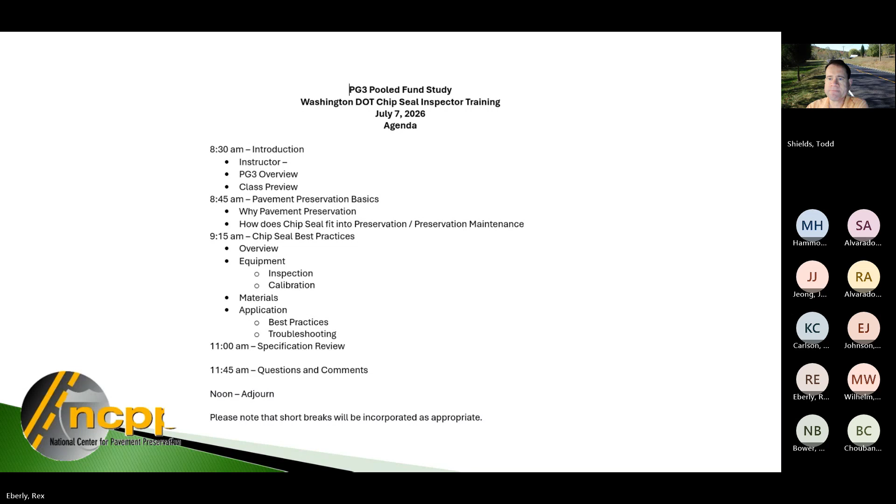Thanks, Eddie. Do you know if Joel's going to be joining us, Eddie? I guess we'll see if he jumps on. He's not on currently. Yeah, Joel is Minnesota DOT, and they're the lead, as you're going to learn here in a second. So we'll see if Joel makes an appearance.

Rex, there we go. You want me to keep going, or it looks like this is my part anyway, unless Joel's on. Rex, you're muted. Oh, no, you're not. Did we lose you, Rex? No, here we are, I'm sorry. Okay, yeah, go ahead, I'll let you take over from here for this next couple of slides. Eddie and Bouzid, if you want to jump in and add anything, that's fine. Go ahead and move on.

So just wanted to explain a little bit here, background for most of you guys, I'm guessing may not fully understand what this project is. PG3 is kind of a colloquial term, the title is actually there, you can read it: The National Partnership to Improve the Quality of Pavement Preservation, Treatment, Construction, and Data Collection Practices, which is quite a mouthful.

So this is a pooled fund. If you're not familiar, pooled funds are mechanisms for states such as Washington to jump in, partner with other states, and pool your funds, as it says, to accomplish a bigger project than what you'd be able to do on your own. PG3 is a pooled fund, and there are some websites here, the actual solicitation and the PG3 website.

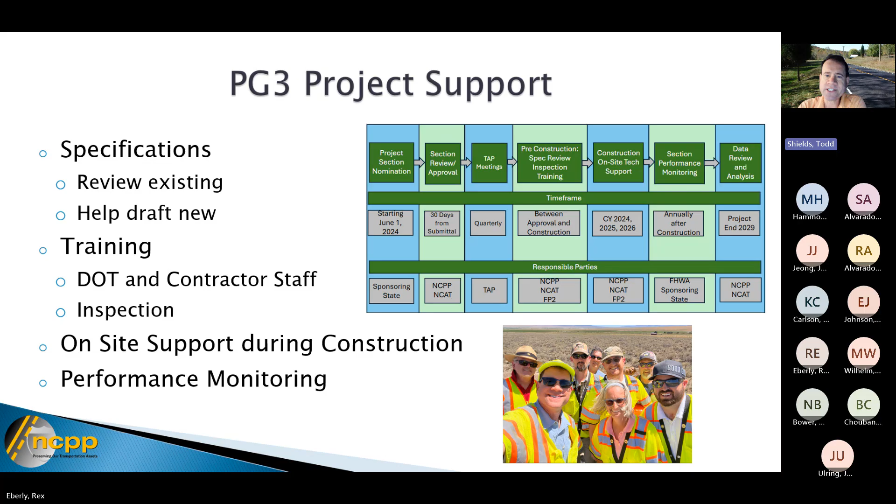So what we do, last year we kind of got into the swing of things. North Dakota joined the pooled fund. They had built a bunch of test sections prior to PG3 even starting, so they're just looking for help, training, and data collection on those test sections that they already built.

Mississippi, last April-ish, constructed their scrub Cape Seal, which was a first for them. Idaho did their first 100% RAP chip seal, which is something that's really catching on nationwide. And then Minnesota did another scrub Cape Seal way up north. North Carolina did a spray-applied rejuvenator, which was part of the PG3 project, and they're starting to take off and do a lot of that now.

And then Delaware is trying to get back into microsurfacing. They've got an interesting situation with a road that has a lot of Amish buggy traffic, so they're using the microsurface to fill in the ruts caused by the hooves on the horseshoes.

And then coming up in 2026 — well, Alabama's already done their scrub Cape Seal, which was a first for them. That was done in April, May.

Alaska just in the last couple weeks did a chip seal in the Juneau area. If you guys are familiar with Juneau, there are no roads in and out of there, and it's a rainforest, so that was an interesting one. They had to actually bring equipment in. They had some issues, but they got it done. And then we think next up will be you guys with your rut fill chip seal.

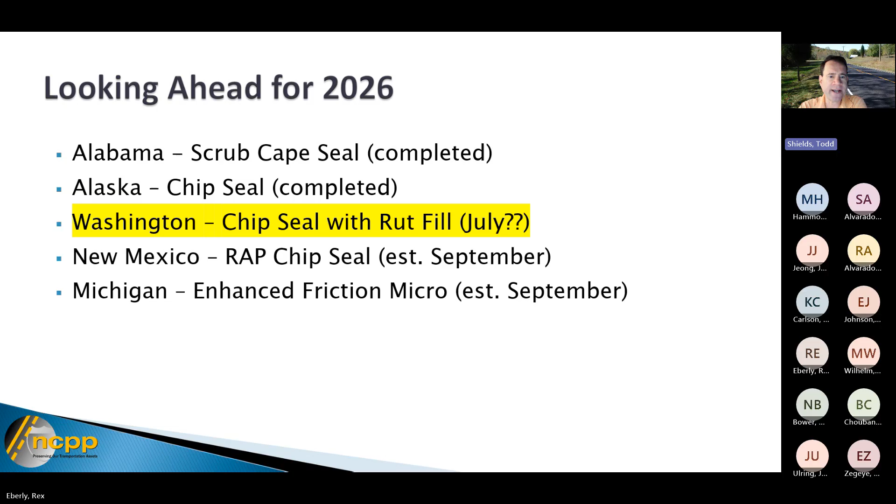Okay, very good. And then for sure this year we'll have New Mexico — they are also going whole hog into RAP chip seals, and they're looking at September for that one. And then Michigan DOT has been poking around with less expensive versions of high friction surface treatments. They're calling it enhanced friction microsurfacing, not to confuse it with the other, but they're blending in the calcined bauxite with their native aggregates and seeing how that performs. So they're looking to do that in September as well.

So there's a website, I mentioned that earlier, the PG3 study website. If you want to visit that, we post all of the trainings that we do.

This will be posted out there, so you can go back and look at other states that we've done training for, information about the fund, upcoming meetings, and other resources. There's some forms Rex is going to get into in a little bit that are out there on the website.

Some upcoming activities. We got our training with you guys today. Karen's in Japan, so she's not able to make today, but we do have another virtual TAP, the technical advisory panel, coming up middle of August. That'll be about an hour or so, virtual.

We do have two in-person TAP meetings every year. We met back in May in conjunction with the Northeast Pavement Preservation Partnership. The next one in person will not be in conjunction with a partnership meeting, but a standalone visit and tour of the MnROAD test track.

Following that, there'll be another virtual TAP over the winter, and then the first in-person meeting of 2027 will be in May at the NCAT facility. They do a 3-year cycle on their test track, so this will be starting a new cycle, and we'll be part of that.

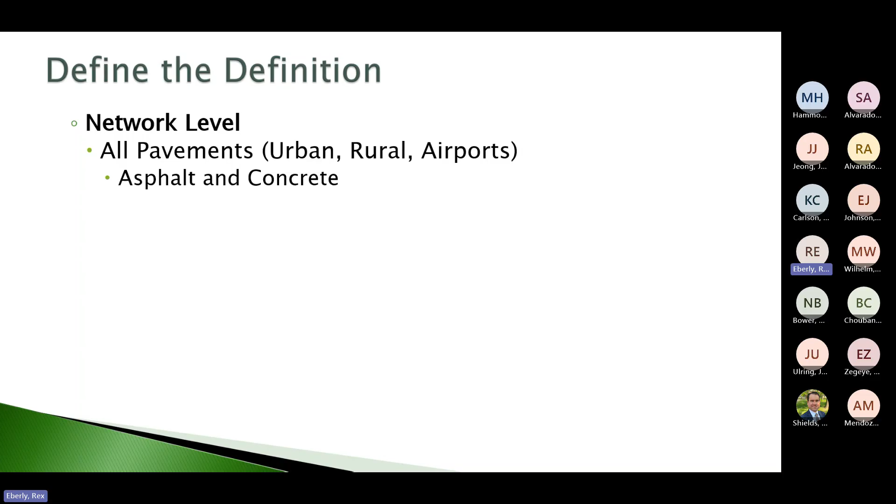You need to look at your asphalt and concrete. For so long we've thought concrete doesn't need preservation. Well, it does, and there are things we can do to your concrete pavements to help them last longer as well and keep them in good condition. It needs to be a long-term strategy, a budgeted expense.

The best states who really excel at pavement preservation budget for it, and they don't take money out of their pavement maintenance or preservation fund when they have a hurricane or a downturn in the economy or whatever issue. They continue to fund that pavement preservation because they understand that keeping those good roads in good condition saves them money in the future. And it needs to be integrated.

It needs to be department wide, all stakeholders. So I guess what I mean by that is if your maintenance department has a pavement preservation strategy but your pavement engineer group or other parts of the DOT don't, you're working against each other. The entire department needs to buy into pavement preservation. And again, cost effective—right treatment, right road, right time.

One way to bring this home is we've been working quite a bit with the Mississippi DOT and did some training, almost a month of training in Mississippi this spring. One of the things they told us, the reason they decided they better get into pavement preservation, is they did a study over the last 5 to 10 years. Their, and I'm using air quotes here, pavement preservation process of choice is a 2-inch mill and fill, which is really almost outside what we really think of as a pavement preservation tool, but that's what they had.

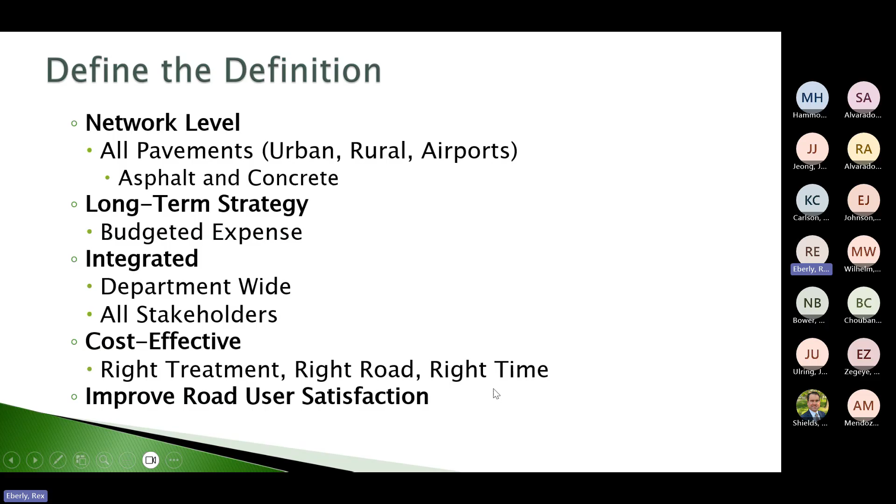We want to improve road user satisfaction, obviously. So again, why develop a preservation mindset? Your budgets—you guys know this. Few agencies can afford a strategy of build it, rehab it, and build it again.

Bouzid could do that in Florida because he had a mouse giving him some money with Disney, but most agencies don't have that. So pavement performance, your FHWA performance thresholds are going to be difficult to meet without preservation. If you're having to wait 18 years before you can afford another rehab on a roadway, those performance thresholds are going to drop and you're not going to meet them.

Material changes—I don't know about your area, but every other location in the country I talk to, pavements aren't lasting as long as they used to. When I ask folks how long a new overlay is going to last them, around the country I'm hearing 8 to 12 years. Is that about what you all are seeing, or are you getting better or worse than that?

So preservation stretches the service life of these pavements. And then the other thing is sustainability. We've got the Carbon Reduction Act and environmental product declarations. Washington State has a carbon reduction strategy.

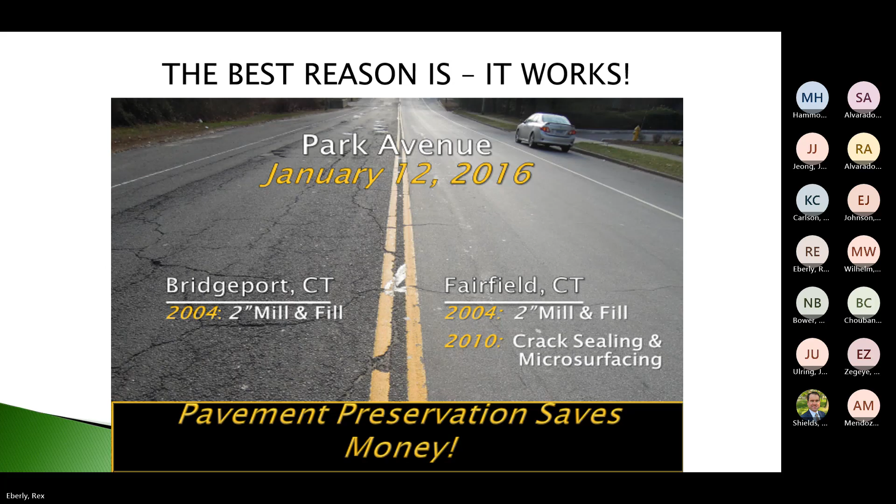So why don't we just mill and fill everything? Well, let's talk about that.

So we're going to look at one state. This is a worst-first state, very overlay heavy. These are their 2023 numbers that came off their website. They spent about $1.6 billion for what they called roadway preservation activities. They consider that capital preventive maintenance, usually mill and fills, and then highway, freeway, and non-freeway resurfacing.

In 2023, they covered 2,138 lane miles of their 32,000 lane mile system, or about 6.7% of the network.

So if you take that out, that's a 15-year cycle. They get to a road in 2025 and they're not going to get to it again until 15 years down the line. But we've already determined that our pavements are lasting 8 to 12 years. So we already know we're in trouble. And because they're worst first and they're not doing any light preservation, they're doing all heavy work.

That $1.6 billion over those 2,138 lane miles was $748,000 per lane mile. I gave this to that DOT. I was down doing training because they were seeing this internally. I don't think they'd looked at it this way, and they knew that they had to change.

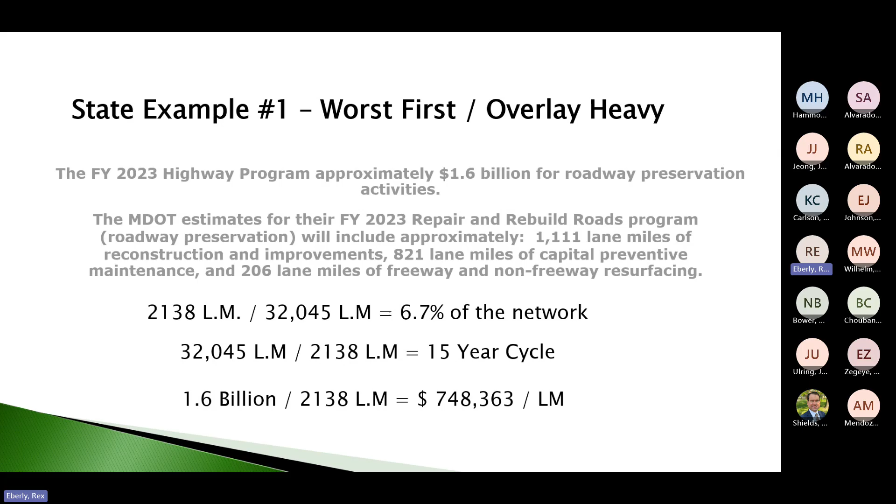That's all they touched with anything in 1 year - 6.7% of their network. He says, I don't know where we're going to go from here. I don't know how we can get out of this. So that's a place we don't want to be.

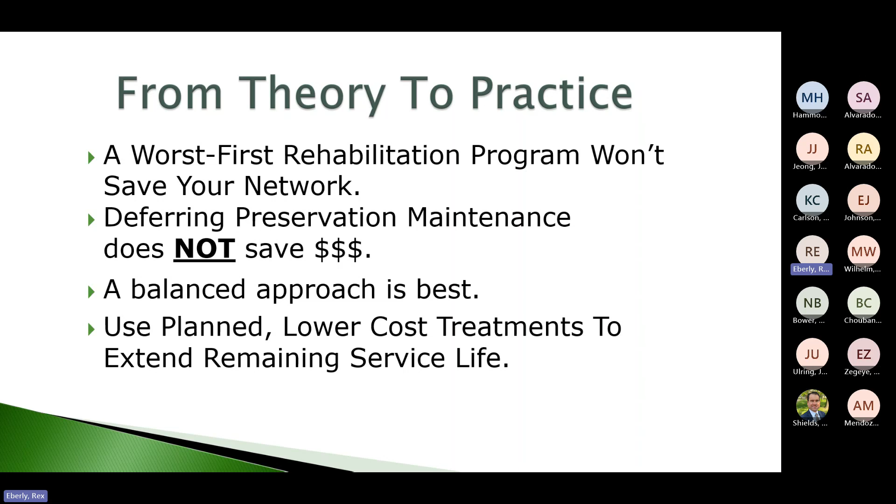That's what this study is really all about, using planned lower cost treatments to extend remaining service life. I like to talk about preservation and preservation maintenance. True preservation to me is placing a treatment that preserves the surface and extends the remaining service life of the road. We're doing this on a road that is in good condition. Preservation maintenance is repairing surface defects, but then still preserving the surface and extending remaining service life. So patching really isn't preservation maintenance. Patching is just reactive maintenance. There's no preservation to that.

True preservation is time-based. We're learning now that the quicker we put something on that pavement to stop or slow oxidation and moisture intrusion, the better we are. And we shouldn't wait until we see deficiencies in the pavement distresses before we do something.

So preservation's early and often. Preservation maintenance is time and condition based. You know you need to keep up with that pavement, you need to schedule it, you need to work to get up to that 20-25% touches per year, but you also have to be condition based. So you place as early as possible when defects occur. We're adding service life, or we're stopping deterioration and adding service life. The best thing is these preservation treatments are generally less expensive.

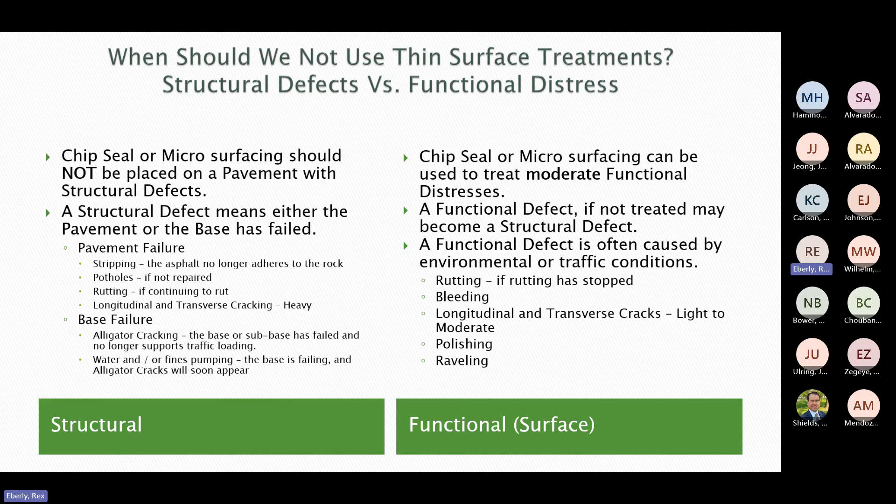With a functional distress, which is what we call a surface distress, chip seal or microsurfacing or any of these thin treatments can be used to treat moderate functional distresses. A functional distress, if not treated, becomes a structural defect down the line. A functional defect is often caused by environmental or traffic conditions. It can be rutting. If the rutting is stopped, then we can do something with it. If we've got bleeding or flushing, longitudinal and transverse cracking that's light to moderate, polishing and raveling, those are functional issues, functional distresses, and that's where pavement preservation processes shine.

We learn a lot from roadresource.org. This is a website that was put together by the PPRA, which is an affiliation of the International Slurry Surfacing Association, the Asphalt Emulsion Manufacturers Association, and the Asphalt Recycling and Reclaiming Association. If you've not been to roadresource.org, there is tons of information there on pavement preservation, treatments, network optimization, pavement preservation, recycling, all sorts of stuff. I really recommend that you use this source. It's really good when you bring in new folks that haven't been introduced to pavement preservation, and they can spend some time on this website and get up to speed really quickly.

Let me get a drink of water here.

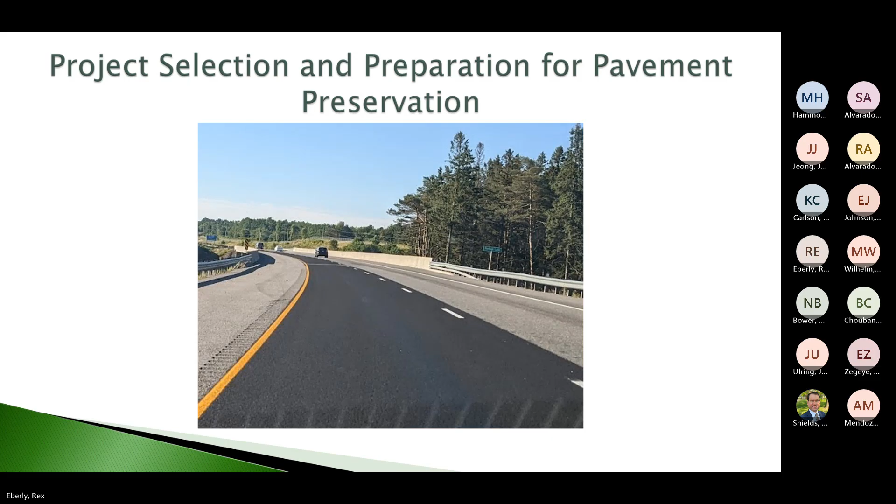Okay, so project selection and preparation for pavement preservation here. We're not going to go too deep on this, but as a designer, if you're designing a preservation project, the number one thing you got to understand is the intent of the preservation. Do I have a road that's in good condition with no defects or very few defects, and I want to keep that in good condition for another 5 years? Is that my intent? Or do I have surface defects that I need to repair first and then preserve that road for another 5 years? So what's my intent?

Do I have any untreated light to moderate cracking? We always want to crack seal first. I don't remember if I get to it, but the NCAT PG2 study showed that sealing cracks is probably the most cost-effective way of preserving a roadway, and that a road that's been in good condition, crack sealed, stays in good condition for at least 12 additional years.

Do I have untreated rutting? More than a quarter inch—those cause issues for some preservation projects, so I need to understand what kind of rutting I've got. Do I have isolated base repairs, or do I have a whole bunch of base repairs? What's the most cost-effective way of preparing this roadway for preservation?

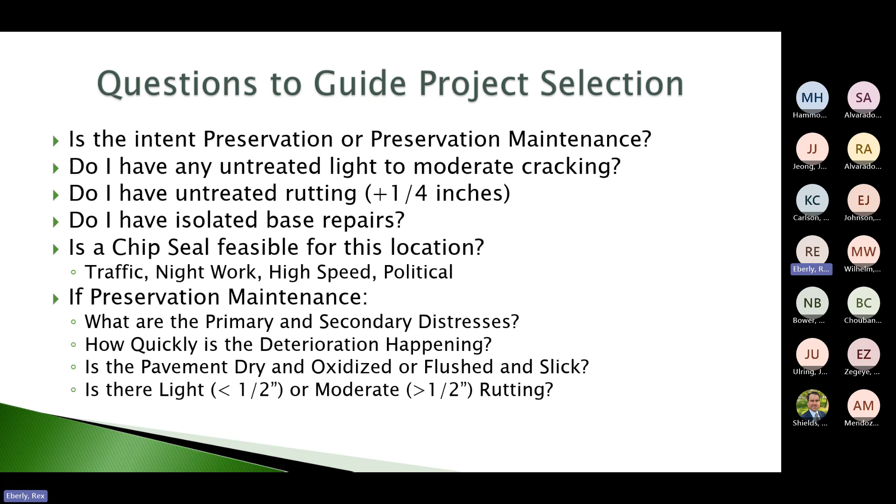If it's preservation maintenance, what are the primary and secondary distresses that I need to take care of? Is it cracking? Is it rutting? If it's a lot of minor cracking, can I take care of that with a scrub seal rather than having to go out with a crack filling crew and get them dizzy going all around filling all the cracks? How do I want to do that? How quickly is the deterioration happening? Is that road falling apart quickly, or have we just had a few cracks in the last few years, so maybe a lighter preservation treatment can really help and keep it going? Is the pavement dry and oxidized, or flushed and slick? That makes a difference on what treatment you select. Is there light rutting, less than a half inch, or more moderate rutting, more than a half inch?

Okay, so we're going to go into chip seal selection. Again, we are talking best practices here. There are times in the field where you all as engineers may need to make decisions based on budget, based on need, based on political issues. But from now on, we are talking best practices and how we hope it can be done.

Good candidates for a chip seal are minor cracking, raveling, loss of fines, some flushing. To me, that photo is maybe a little heavy on the flushing, but we can do a good job with the chip seal reducing the effects of flushing—probably not bleeding, though.

Oxidation is a perfect candidate for chip seal, followed by loss of friction. So that's a very good use of a chip seal.

Unacceptable candidates include rutted pavement if the ruts have not been repaired. This photo of rutting shows why it's not a great candidate for chip seal, because the asphalt emulsion is going to act somewhat like water. If we don't do certain things, which we'll talk about later, chip sealing on rutted pavement means we'll have asphalt emulsion where we don't want it, embedment too high, and we could have bleeding and other issues. So unrepaired rutted pavement is generally an unacceptable candidate.

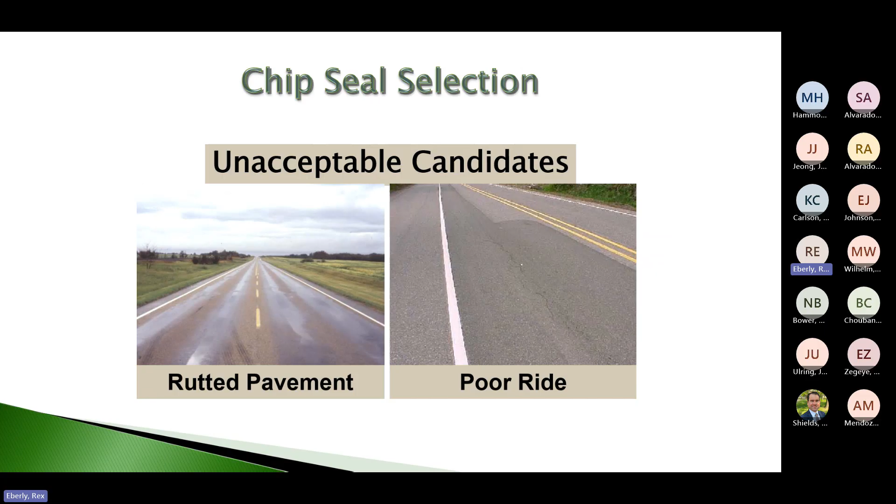Untreated cracks greater than a quarter inch need to be treated. We'd like to treat all cracks, but anything over a quarter inch definitely needs treatment before we chip seal, because the chip seal emulsion will not seal that crack completely, and it will allow chip seal aggregate into it, and that crack will grow over time.

Preparation for all preservation projects is the same. The early stage is crack treatments. We really want to crack treat before doing a preservation process, and like to have that done at least 30 days ahead of time if we can. We want to get traffic on that crack treatment to level it out and get it down into the crack, so we don't have bumps. We want our overbands on crack treatments to be thin, within about an eighth of an inch thickness, so we're not leaving a bump under a chip seal or picking it up with a microsurfacing spreader box.

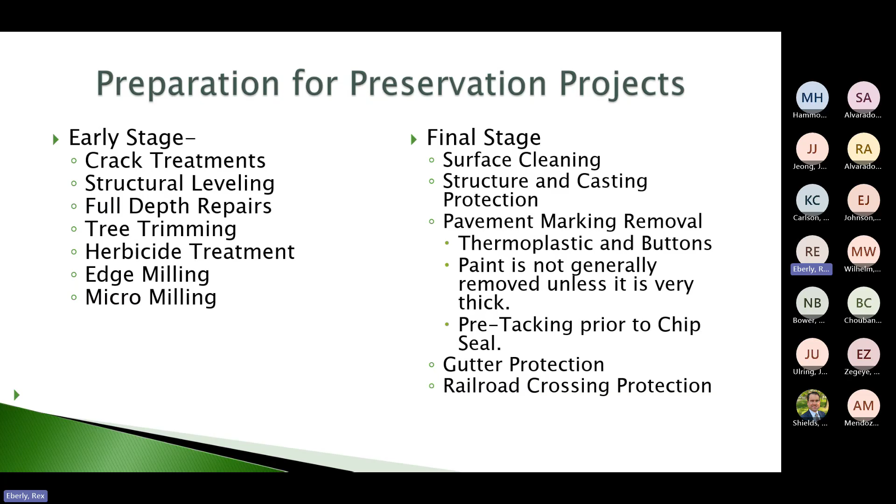Crack treatments should always precede a surface treatment. We like to see them completed at least 30 days prior. Overband thickness should be less than 1/8 of an inch. If you're using mastic, it's a great product under pavement preservation processes. We want those usually to be flush or slightly below the surface.

We need to remember with any of these thin treatments, we can kind of level a dip or a low patch or a low crack or whatever. We can level that a little bit. But if your maintenance application, whether it's a patch, crack treatment, or mastic, makes a bump, we're going to have a bump when we're done. There's nothing we can do about that.

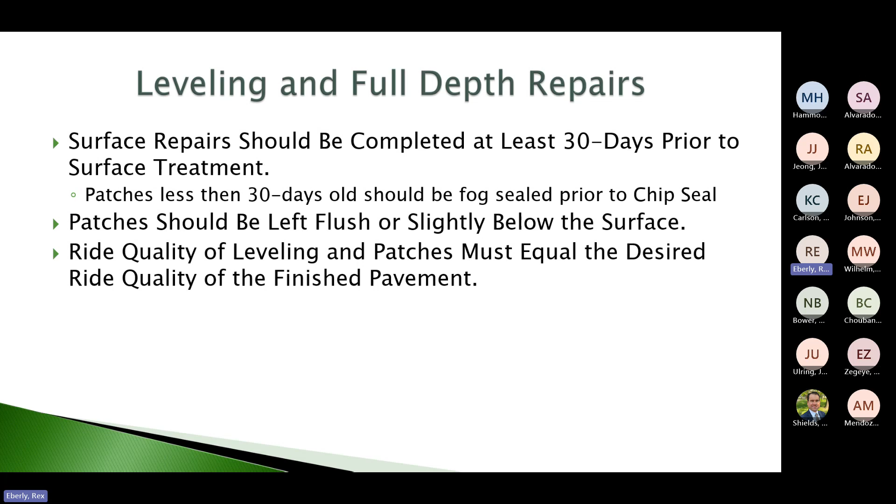So we want to be careful with all of our patching or crack treatments. I think we talked about that here - completed 30 days prior, fog seal, left flush or slightly below the surface. Ride quality of leveling and patches must equal the desired ride quality of the finished pavement. We can't fix rough patches with these thin treatments. A bump's always going to be a bump.

It really helps the preservation adhere. It takes away some of the rutting. It takes away some of the roughness. It's a good treatment to do underneath your preservation treatments.

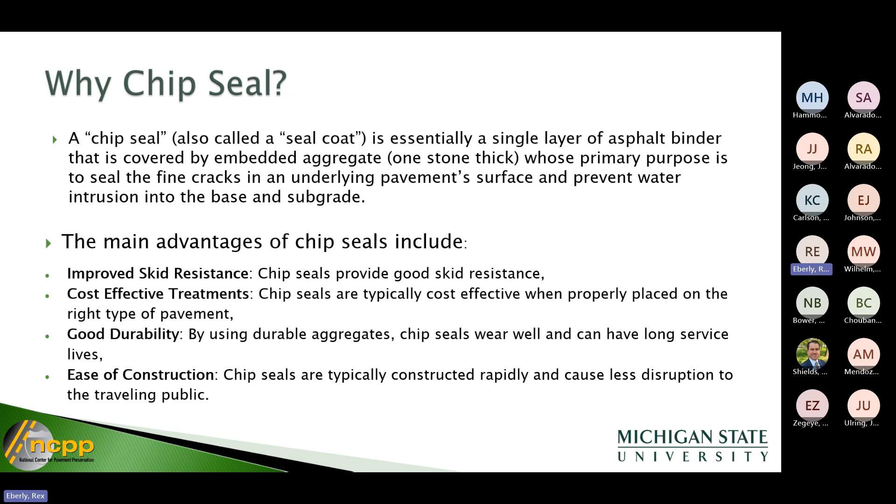And then construction, ease of construction. They're done rapidly, don't take a ton of equipment. They do take a lot of skill - it is an artwork - but they don't cause a lot of traffic disruptions, so it's just a really great process. And I'm an old microsurfacing guy, so for me to talk up chip seals this much, you need to understand I do think they're a great product.

We've talked about most of this, but the good thing is, and you guys are learning this, you're using it now - chip seal can also be an effective form of minor rehabilitation. Especially if we double stack a chip seal, or use a chip seal before as a cape seal, or even some parts of the country use chip seal as an interlayer below their hot mix, and it works really well for that as well.

So a lot of reasons to use a chip seal.

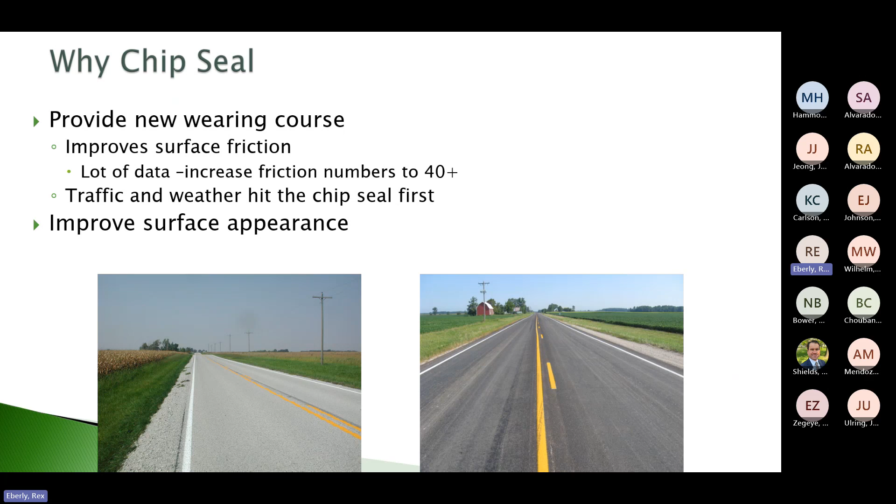We're arresting raveling, talked about that. New wearing surface friction - I think that's one of Todd's chip seals there on the lower left, one of the limestone seals in Indiana. So it helps that surface appearance. However, we've got to remember, a chip seal does not add structure to a road.

If you have a bad road before, you're still going to have a bad road after. So we just have to realize that when we're choosing these roads to put a chip seal on.

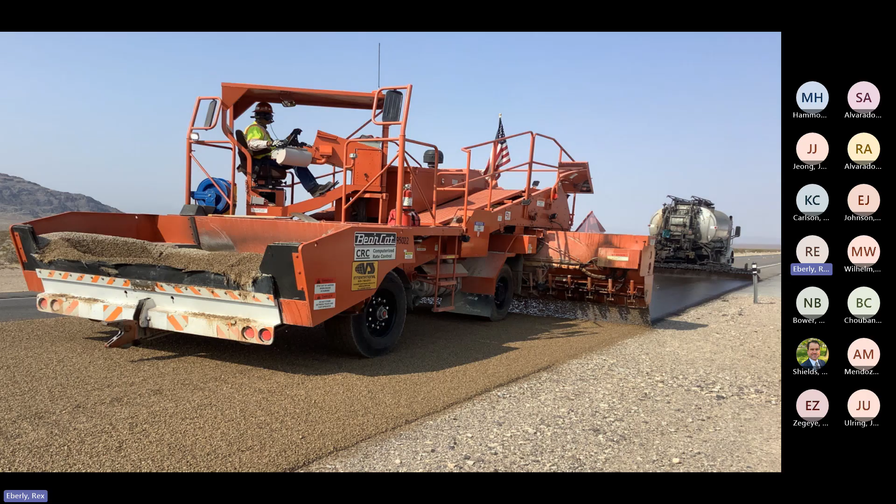Just love this picture. I stole this from somebody out west. They're doing everything right here.

This may be a hot rubber chip seal, it may not be an emulsion, but they are right behind that distributor, getting those chips on before it has time to break or cool, depending on the asphalt, liquid asphalt that we're using.

Love it. Got the American flag there, makes me happy.

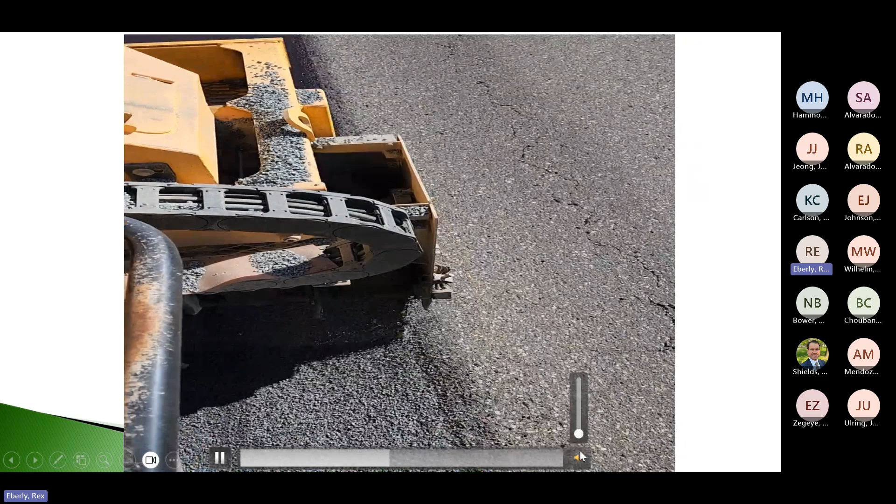And another one here, shown there on the chip box, with that joint there, looking really good. The crew did a good job up there.

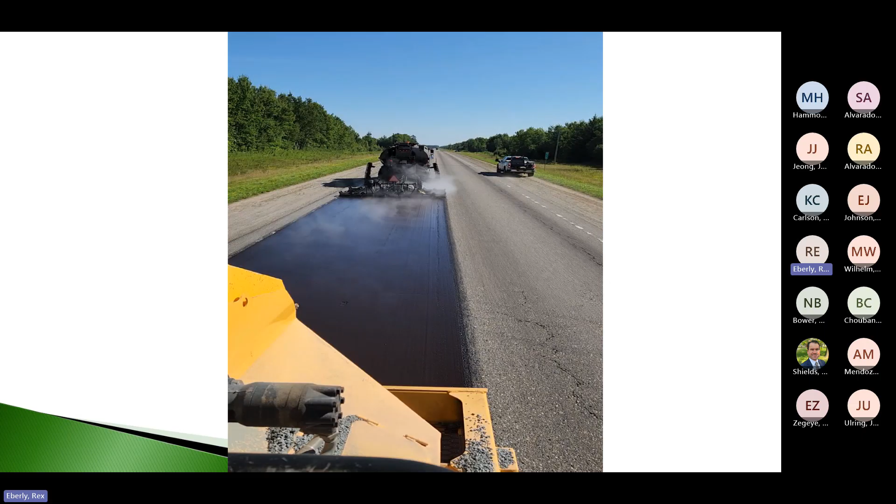And one more. This is a scrub chip seal, so they are scrubbing this in, but you can see how that scrub broom is filling in the cracking, and how the distributor and the aggregate chipper are close together. That is one of the main best practices that we have. As we get forward with you all doing a chip seal in rutted pavements, this becomes even more important, and we'll talk about why as we get going.

Gotta hit the right button here. And one more.

So the chipper pulls up and grabs onto the dump truck. Let's make sure they're latched. Communication is good. You can see the rollers right up where they should be, right caught up.

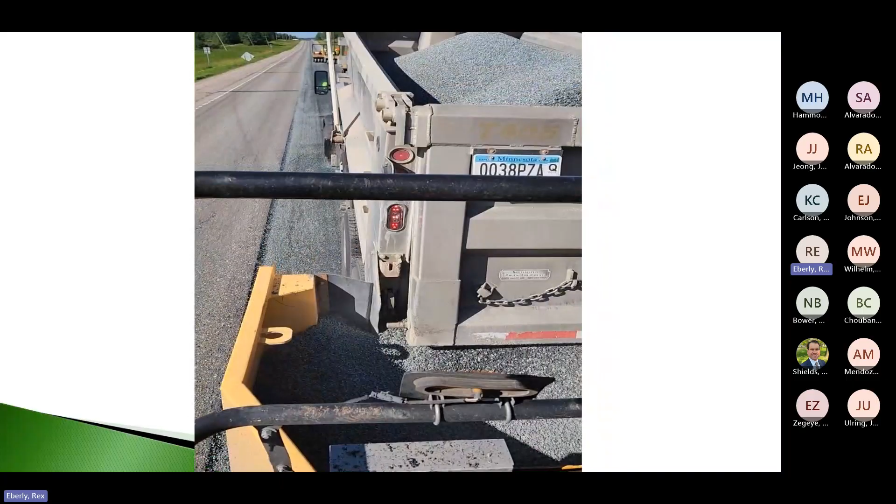So we're going to talk about rollers and how often they should roll. Oh, sorry about that, I hit the wrong button. Go to the next one.

Okay, as we move forward, I want you to think of the term embedment. That is the most important part of a successful chip seal: did we get the stone embedded correctly into the asphalt membrane? That's the whole thing we're trying to do here.

We have sprayed an asphalt membrane at a certain thickness, certain gallons per square yard. We want to make sure that our aggregate gets embedded far enough into the membrane so that it's held by the asphalt and won't come off when we roll it, broom it, or even worse, when people drive on it. But we can't be embedded so much that there's a chance that when it gets hot or when traffic hits it, we're going to either push that stone further into the membrane or have the membrane swell up a little bit and overtop the stone, because then we have flushing and bleeding.

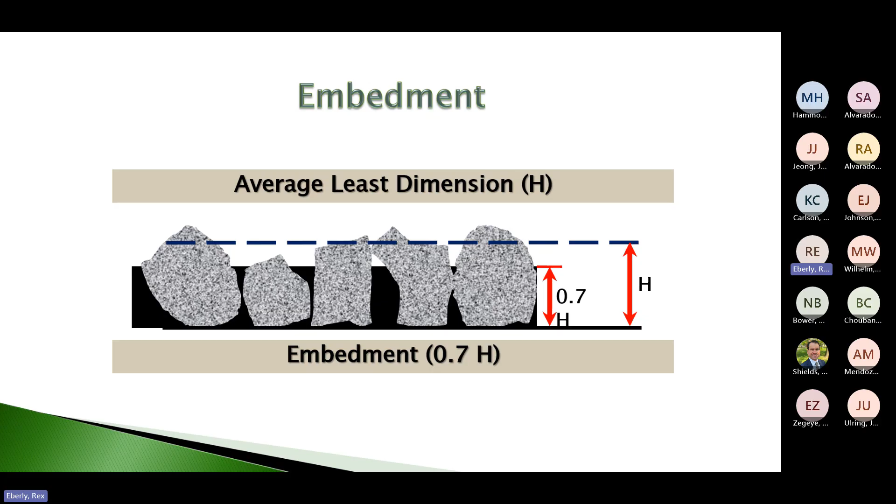So everything we're going to talk about from now on leads us to embedment. That means the materials that we use and all the best practices that we have. That's our goal. Everything that your contractor does out there, everything your materials group has done - I don't know if Washington DOT does the chip seal design or if the contractor does - but everything done in the material section and in the application affects embedment. So the emulsions, the aggregates, the equipment, how the distributor operates, how the chip spreader operates, how we roll, what we roll with, brooms - those make a difference. There are application best practices, and the existing pavement that we're putting it on also has something to do with the embedment.

Let's talk a little bit about emulsions. We're not going to go too deep, but if you want to learn more, the roadresource.org website is excellent. There's a whole set of chapters on emulsion, and it's very good.

Asphalt emulsion is a chemically stabilized dispersion of fine asphalt particles dispersed throughout a continuous water phase as a carrier. Here's a micrograph of what that looks like.

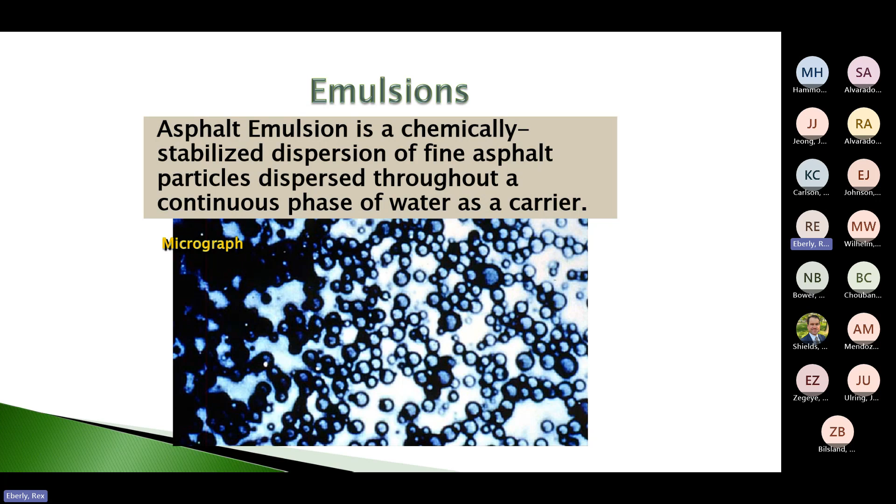You see all these particles that are roughly the same size. What we want an emulsion to do is keep these little particles of asphalt away from each other while we're pumping it, storing it, and transporting it. Then, whenever we want those particles to come together and stick to either the aggregate we mix it with, the road we spray it on, or the aggregate we drop in, we want it to break, set, and cure, release the water, let the asphalt particles grab onto whatever we want them to grab onto, and then become traffic ready. That's how an emulsion works.

These folks are blessed to own this. Every day they go out with a track excavator and dig up whatever asphalt they need that day to process, and the next morning the lake is back at the same level it was the day before, and they do it again. They turn that asphalt into all sorts of asphalt emulsions and asphalt cement, and it's used in that region. For the rest of us who don't have a lake of asphalt in our backyard, we have to use crude oil.

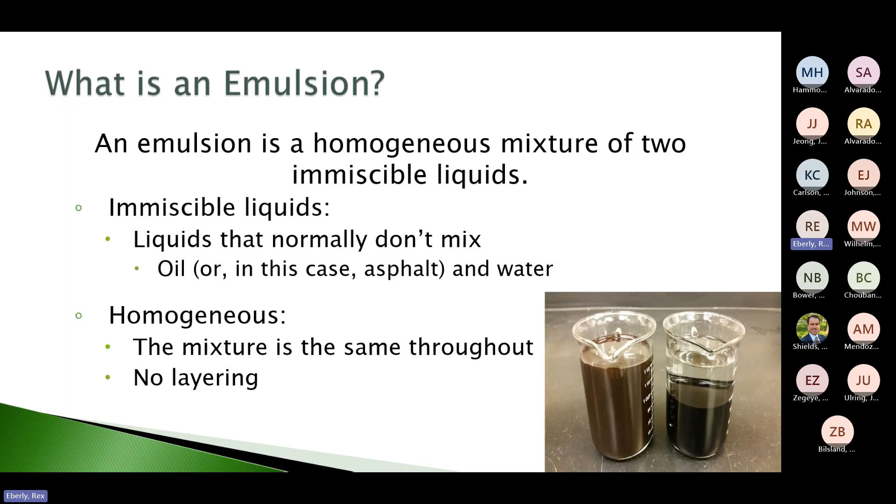Again, it's a homogeneous mixture of two immiscible liquids, and that's hard to show in a presentation. Homogeneous means they're all together - you don't see any separation in that photo. Immiscible means they don't normally mix: oil, asphalt, and water.

The manufacturing process is pretty simple. We take what's called a soap solution - that's the term used - which has water and emulsifier. The emulsifier, for lack of a better term, acts just like Dawn dishwashing liquid, and that's why we call it a soap. Some of them are very similar to soap.

So what we're doing is slicing those asphalt particles and turning them into little droplets, very fine droplets of asphalt. Then we're injecting that soap solution into that, and the emulsifier coats all of those little bitty baby particles of asphalt with the emulsifier. Then we pump it into the tank and we can store it.

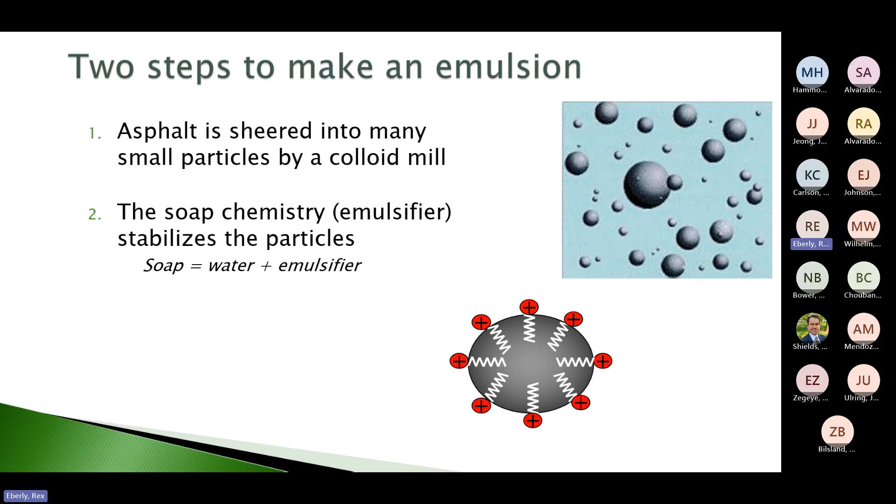That one's kind of a little bit more on the colloid mill. An emulsion plant is not a big operation. At a company I used to work for, we had one in a 40-foot shipping container, and that, plus some plastic tanks and a water source, and you are in the emulsion business.

The emulsifiers and additives that we put into the emulsion can be latex for flexibility. There are all sorts of different chemical packages that the emulsion supplier will use. What that does, again, is stabilize that emulsion, so we don't want it to separate until we want it to. And then it gives it its curing characteristics, and helps it grab onto the aggregate differently or better.

So it's very important. What I like about emulsions is that the manufacturer can really tailor an emulsion to the job you're doing, the aggregate you're using, sometimes even the contractor. They can make changes that one contractor needs that another one, with their process, maybe doesn't. Really interesting stuff. There we show those little particles bouncing around because they're all positive in a water phase.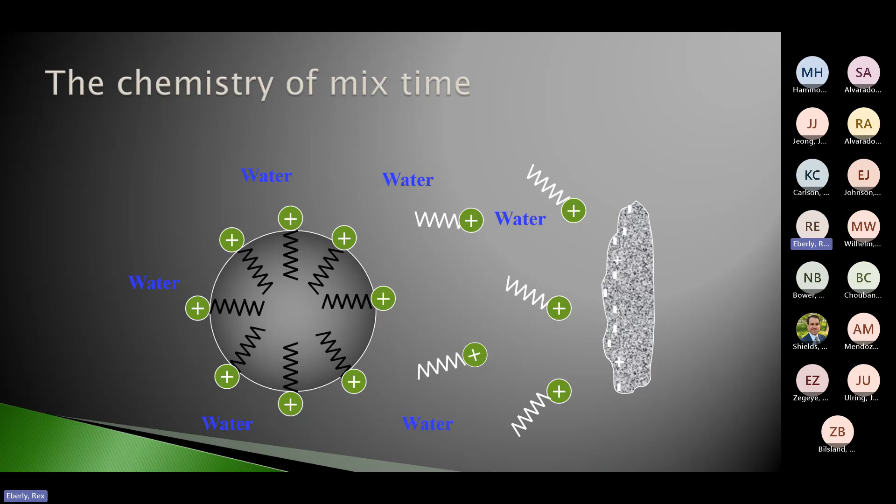And then that aggregate particle is either negatively charged or very slightly positively charged. So all those little positive ions coated around the asphalt particle are now attracted to that aggregate, and that asphalt particle will move and grab onto it. Boom, we've got what's called the chemical break, where the asphalt cement is now turning from an emulsion into asphalt cement. It's grabbing onto that aggregate and building strength like we want.

This asphalt is no different than the asphalt you're using in a hot mix HMA project. It may be the same asphalt, it may not be, it may be better, but where they're using heat, we're using water. Once that water is out of the system, you're left with an asphalt surface treatment, just like if it was a hot mix overlay. Emulsions are not inferior to hot mix paving.

So for chip seal emulsion, most parts of the country are using what's called a CRS-2P. Let's talk about what CRS-2P means and why it's important to the embedment. Number one, C means cationic, or positive charge. We saw in those little diagrams that it was a cationic emulsion because the coating of emulsifier had a positive charge to it.

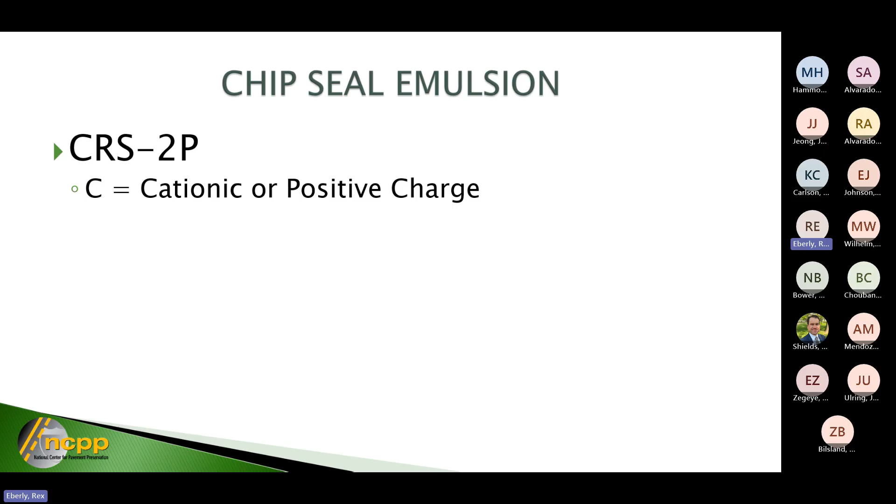There are also negatively charged emulsions, which would be an RS2P. We find that the cationic emulsion, because of the aggregate charges that most places have, is going to grab that aggregate quicker and build strength quicker than an anionic emulsion, one that's negatively charged. But there are places where that anionic emulsion works better with the aggregates they have. But I think we're using a CRS-2P.

The RS means rapid set. Set means how quickly the water is going to start separating from the asphalt cement particles. How long is it going to take till asphalt starts sticking to each other and starts sticking to the aggregate or the roadway, whichever we sprayed it on. So we want a chip seal emulsion to be rapid set.

There might be some ruts. When you drop that aggregate particle into that membrane of asphalt emulsion, you want it to start grabbing that rock immediately and going from a liquid to a solid so it doesn't have time to run off the road. If your 12-foot wide membrane spreads out to 12.5-foot wide because it won't break, set, and cure, then your embedment's lost.

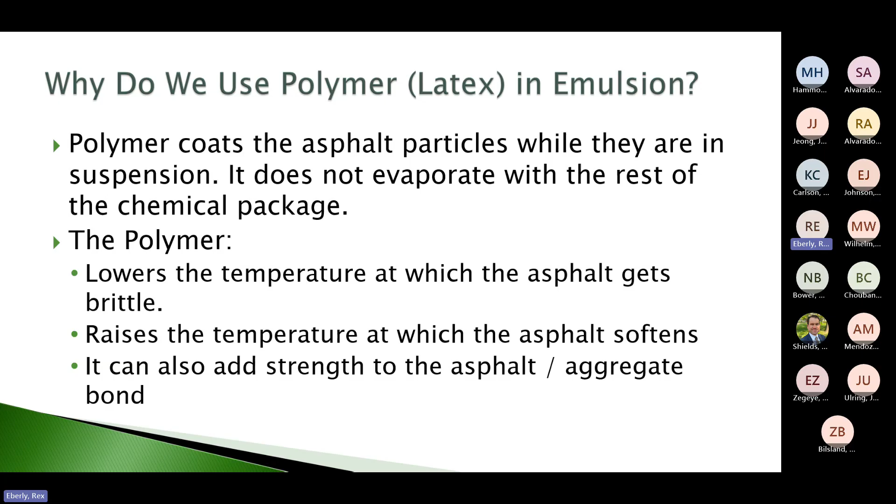That polymer changes the temperature at which the asphalt gets brittle. Where it may normally get brittle at -10, it's not going to get brittle until -30. And if it's going to move and push and shove at 135 degrees, adding polymer may give us a road temperature of 155 before it starts to move and shove on us. It also can add strength to the asphalt-aggregate bond. So I'm glad you're using polymers.

So let's talk about that aggregate. Number one, we really want a mostly single size aggregate, like shown on the bottom there. We don't want the dense graded aggregate, which means that we have aggregates retained on all of, or many of the sieves going through from 200 to 100 to 50 all the way up to 3/8 inch.

You can see there, if we have lots of different size aggregates, then we don't have the embedment that we want. You can see those little chunks of, I don't know, 30, 50, 16 falling down into the membrane, and then they're holding up the 3/8 inch stone, so it's hardly embedded at all.

And then also those are pushing some of that asphalt membrane up, so it's overtopping some of the other aggregates. That dense graded stone is going to be a poor quality chip seal, and you have a good chance of having a flush chip seal, either because you lost your stone or because the stone was overtopped by the asphalt membrane.

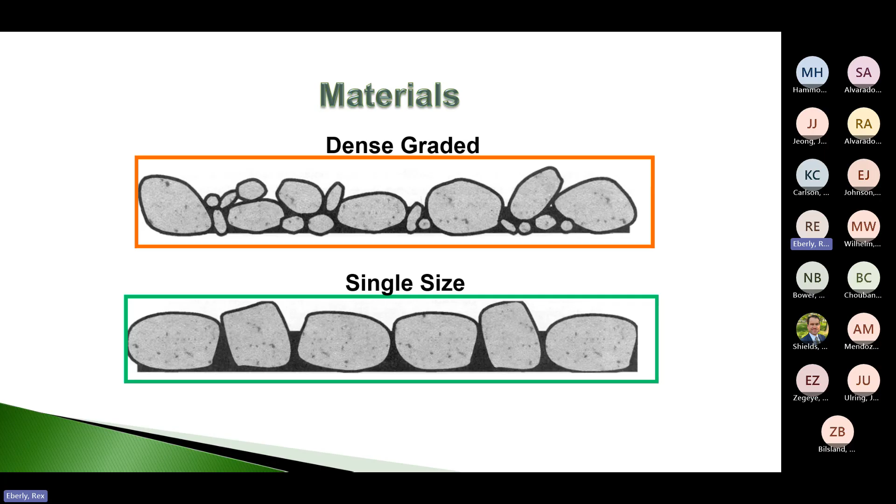So on the single size, you'll see that we don't have any of those little stones in there holding up the bigger stones. We don't have any small stones that are going to get overtopped. And that's really important when you look at your gradation.

We get our best aggregate performance on a chip seal when we have single sized with minimum fines. The fines that we have need to be clean. It's okay if they're rock dust. We can't have silt or clay fines - it needs to be free of clay.

That single size aggregate, we want it to be as cubical as it can be. If it's rounded, it's going to roll around. So we definitely need crushed faces, and we would love to have every face crushed and at least two sides crushed if we can get that. We want it to be abrasion resistant.

So the LA abrasion test is important because that aggregate is the only thing between the tires of the vehicle and the asphalt membrane. And really the only thing that aggregate's doing is protecting the membrane. It needs to be a tough, hard aggregate that's not going to degrade under traffic.

It needs to be binder compatible. If we have an aggregate that has a positive charge, maybe we want that anionic emulsion. And if we have one that has a very low positive charge or a negative charge, we probably want the cationic material. So it's important that we check in the lab that our asphalt emulsion is compatible with our aggregate.

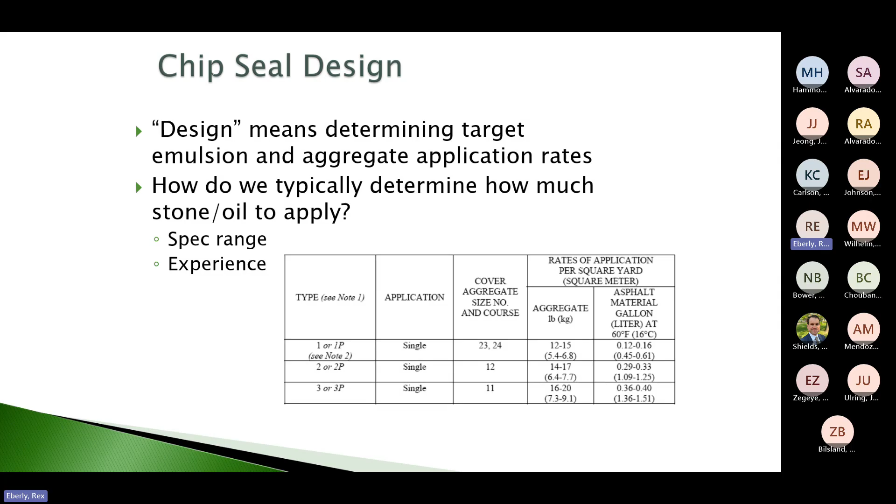So chip seal design, there's the Kearby, there's a modified Kearby, I can't even think about what the other one is, but they really want to look at how the materials are going to react, how much the road is going to drink, how dry is the pavement, and that's what determines our application rate.

You guys doing okay out there? Any questions?

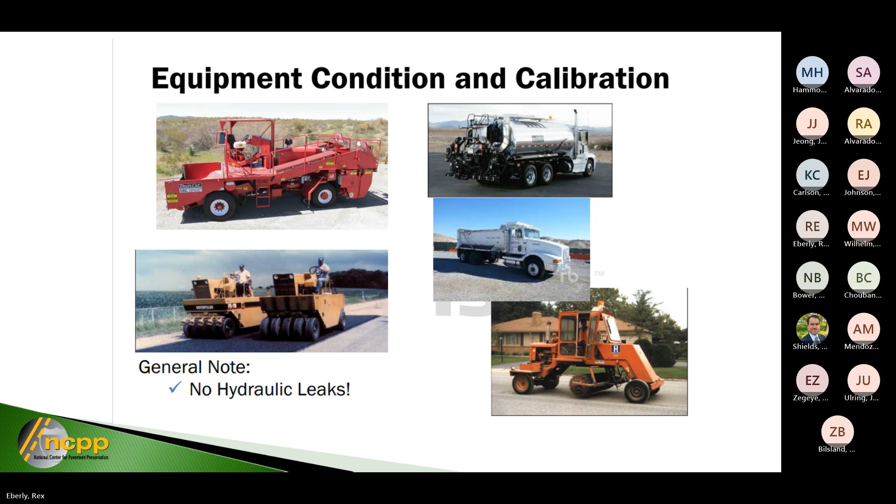Okay, let's talk about equipment. So asphalt distributor, we have a checklist here. The good thing is, we'll just get into it, but pretty much every distributor in captivity anymore has all of these. 15, 20 years ago, you could get distributors out on a job that weren't computerized and didn't circulate and didn't have a radar, all this good stuff. But pretty much now they're going to have this. Now, does that mean it works? No, that's you as an inspector.

That's your job, so it should have a computer. A computer on the distributor watches the pump, watches the speed of the pump, determines what bars are turned on, and then makes a bunch of calculations. It says, well, if the contractor wants 0.32 gallons per square yard and they want to drive at this speed, at this width, then I need to run the pump at this speed to make sure we get the right membrane of asphalt on the road.

They need to circulate between the tank and the bar, so that if we're circulating, we know that what goes out, what gets sprayed, we can measure that. We need a working radar, or some brands don't use radar, they use a transmission meter, but we need to know how far and how fast we're going.

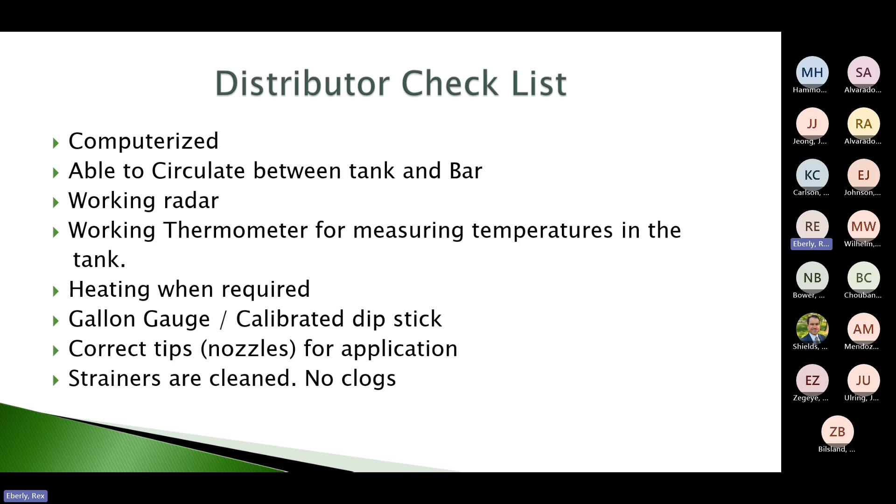And one thing is, if we're not cleaning our strainers, we're getting clogs of asphalt emulsion, clogs in our nozzles. The computer doesn't know that. It thinks you're spraying what it's telling you to spray. And if that material can't get through the system and out the nozzle, you're not getting what you think you're getting.

So why you should check your distributor's calibration - this is really important. On a previous project that NCAT worked on with AASHTO, we did some projects with the new AASHTO chip seal spec, and we had states that put projects out there. It was really interesting that spec requires the contractor calibrate the chip spreader and the distributor within days of the project, and they need to provide that calibration to the state. One of the things we heard back from states that implemented this spec is, well, our contractors don't know how to calibrate their distributor.

And we weren't able to get that done. So we need to make sure that on this project we're checking our distributor's calibration. We're doing that because we want to make sure the computer rate matches what's being sprayed on the ground. We want to make sure we don't have bleeding or flooding of material, but also enough material there to retain the chip and assure a good bond. The fact that we're doing chips in rutted sections makes it even more important that we know exactly how much asphalt emulsion is going on the road.

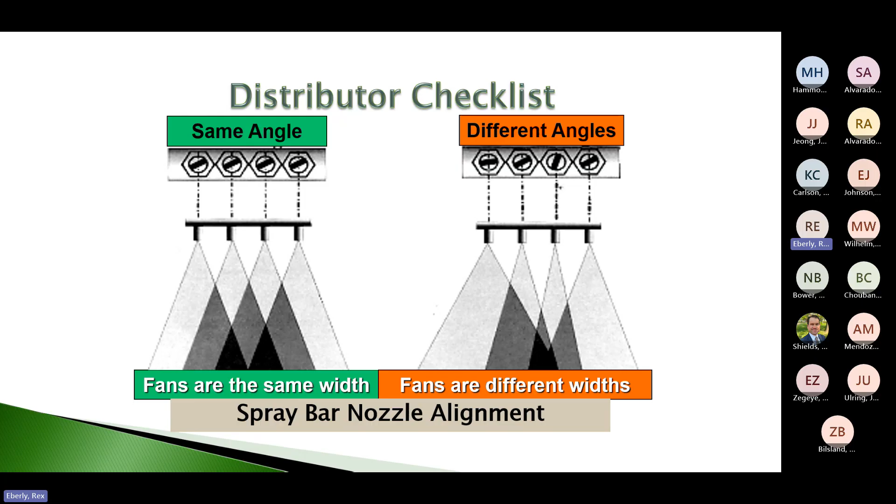We want a triple overlap. Basically what that means - I don't have a good pointer on this system, but if you look at the black area, you're getting spray there from 3 nozzles, and that's what we mean by triple overlap. If all the angles are the same, we're going to get that triple overlap, and that tells us we're getting the material we need there. If you look where you've got the different angles, you're all over the place - you've got some sections that don't have enough asphalt, other sections that have too much, and you're going to have a mess there.

Pretty easy for the contractor to check. It comes with a special wrench. You turn the wrench, it hits the nozzle next to it, and it gives you exactly that 30 degrees.

The next thing to look at is bar height. Most distributors are designed so that to get that triple lap coverage, the spray bar needs to be plus or minus 12 inches above the ground.

Some folks get all concerned about, well, when the distributor's loaded, it could be at 11.5, and then as it sprays its emulsion, it raises up, and pretty soon it gets to be 12.5. We're building roads here, we're not building rockets, so I wouldn't worry about that.

But the way to check this is if you have the contractor leave a nozzle on, like if you look at the second one from the left there, and then turn the next two off, and then spray the fourth nozzle from the right. If you spray those, you'll see, if you look at the drawing, that those fans touch. If those fans touch, that means you're going to have a triple overlap when you do everything else.

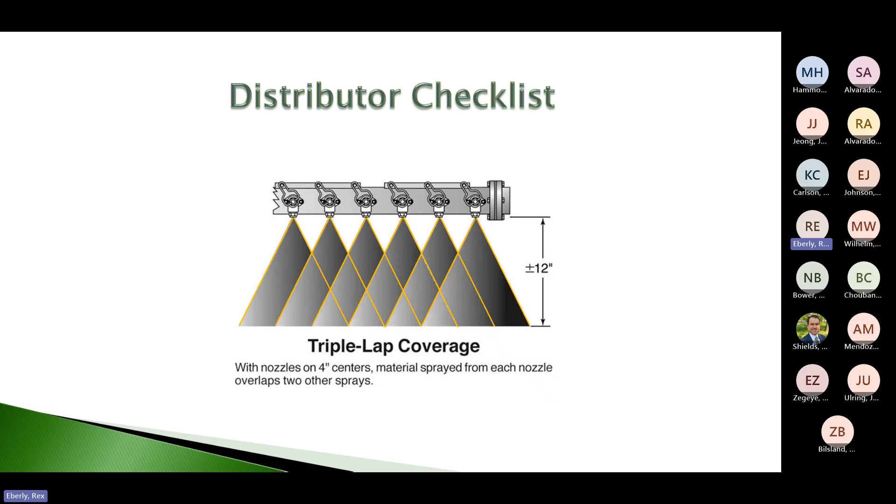So again, if our spray bar height is off, if we're either way, we're either going to have streaking because the spray bar is too high, and we have ridges of asphalt that are higher, that have more application rate than others. So those ridges are an issue, but also just as important is the areas that don't get enough are low on asphalt, and so you've got embedment problems there.

If your spray bar is too low, you're going to have sections again that are lighter than others. You're going to have gaps in between that triple overlap, and you're going to have issues that, thought I had a picture of what that looks like. Maybe it's coming up.

Calibration is important. We don't really want to, even though those distributors have a gallon gauge on them, they also should have a calibrated stab stick or dipstick.

What the operator will do is you drop that calibrated stick down just to the top of the material in the tank. We don't want to dip it into the tank. And then we can measure up to normally a known point on the manhole there, and that will read how many gallons are in that distributor. So we want to make sure the distributor is as level as possible to do that check.

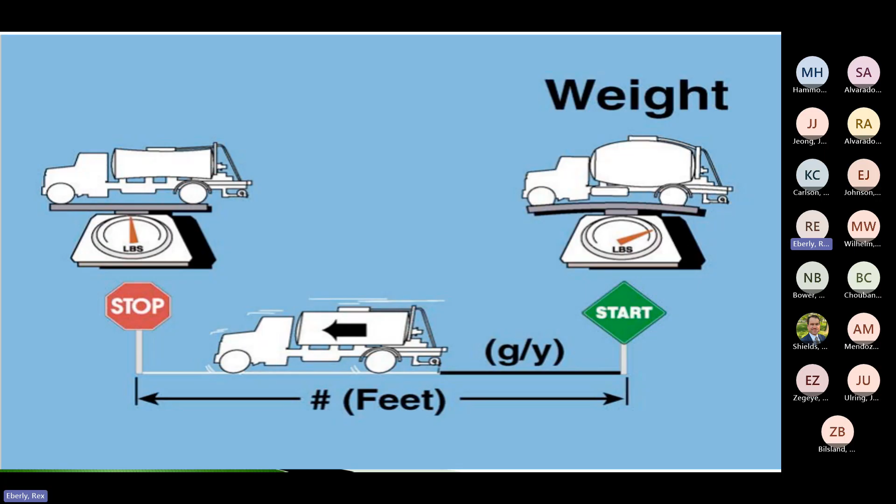If they're way off, there are ways in the manual for the distributor that the contractor can look at to make changes to the calibration to make it work. Now that's spraying the distance, but the next thing is, well, we want to make sure that if we want 0.32 gallons per square yard, we want that rate on the left edge of the road, in the center of the road, and the right edge of the road. We want to make sure that we have a transverse rate check.

And so we also do this same test with the chip spreader. I kind of got my slides all mixed up, something got off there, I apologize.

But anyway, what we do is we'll put in our pads. Some folks use roofing felt, some folks use Petromat, there's all sorts of things, and we want to put pads out that are, it'd be great if they could be 1 square yard in size. Sometimes for emulsion that gets a little heavy, so as long as it's a known square yard of size...

We put them across, and we spray, and then we weigh each of those. We want to make sure that, again, if we're shooting for 0.32 gallons per square yard, we get that all the way across the rate.

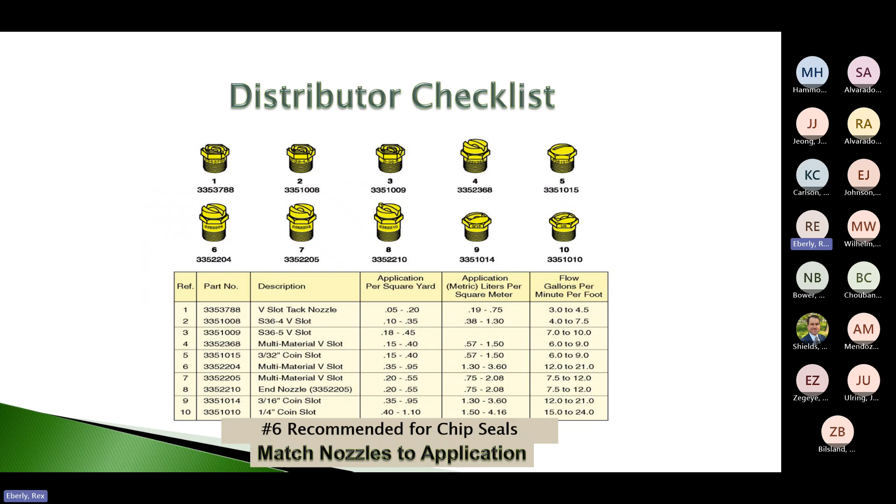Nozzles matter. There'll be a slide rule or a computer app that the contractor will use that will help them determine what nozzle to use. You also want to remember that a distributor that's being used for tack, the nozzles are not what you want for chip seal, and those aren't the nozzles that you want for fog seal. So that does matter.

We want to look at shot rate adjustments due to pavement condition. With a flushed asphalt surface, we need less asphalt emulsion, so we might cut our shot rate down by 0.03 gallon per square yard. If we've got a smooth, non-porous surface, we don't want to make any changes. And if we've got a higher oxidized, more porous, pocked surface, then we probably need to add to our shot rate.

These are things the inspector and contractor need to watch - you can't just start shooting on a chip seal job and forget about it. You can't just look at the design rate of 0.32 gallons per square yard and 24 pounds per square yard of aggregate and shoot that blindly. The foreman and inspector need to be out ahead looking at the road and say, hey, at mile marker 2 there's a surface change, it goes from flush to oxidized, we're going to need to up that shot rate or we won't get embedment. Those folks need to work together and make those determinations.

The spreader checklist is a lot easier. We're just wanting to make sure our aggregate drop is longitudinally correct, and we can calibrate the computer the same way we did with the distributor. The chip spreader folks have pads they give you. Uniform aggregate application is a must, and it's calibrated to ensure consistent discharge across the width.

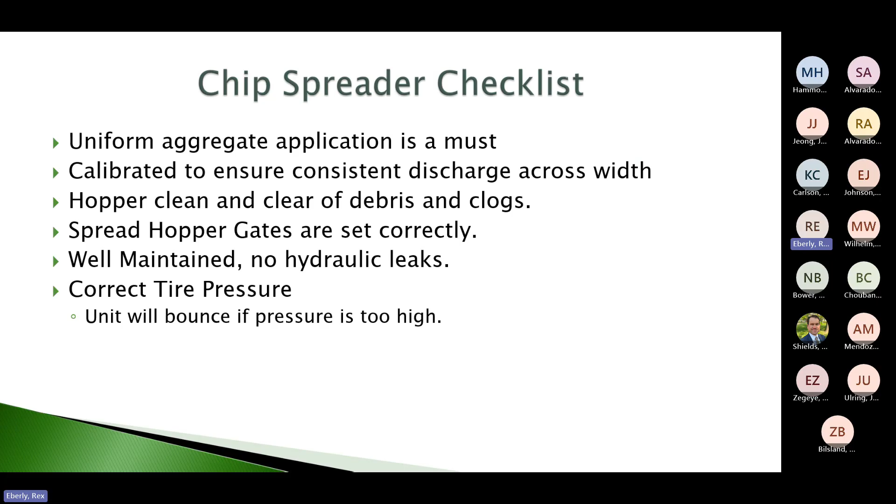We want to make sure the hopper gates are set correctly. Normally all the hopper gates across are designed to open and close at the same rate. Sometimes with a rutted pavement, we may open and close at a different rate over the rut to get a little more or a little less aggregate into that area. That's important. We also want to make sure we've got correct tire pressure - if we've got too high a tire pressure in that chipper, it's liable to bounce as it's going down the road, and that can affect your application rate.

Your haul trucks make a difference as well, so they need to be compatible with the chip spreader. They need to keep their tires clean, and don't want to be doing sharp turns, backing up, or turning on the fresh mat. You need enough trucks to do the job, obviously. We don't want leaks - hydraulic leaks will kill your chip seal before it even gets traffic on it.

We like that they stagger their wheel path as they back up into the chipper. This is really important if you've got a rut in that road and those trucks are just going to try to follow in that rut as they're going down that fresh chip seal. If they're all in the rut that's already got too much asphalt, you're going to have over-embedment before you even hit your rollers. So it's really important that we stagger those trucks and not let them run in that rut. Chip bar and tailgate latch are required.

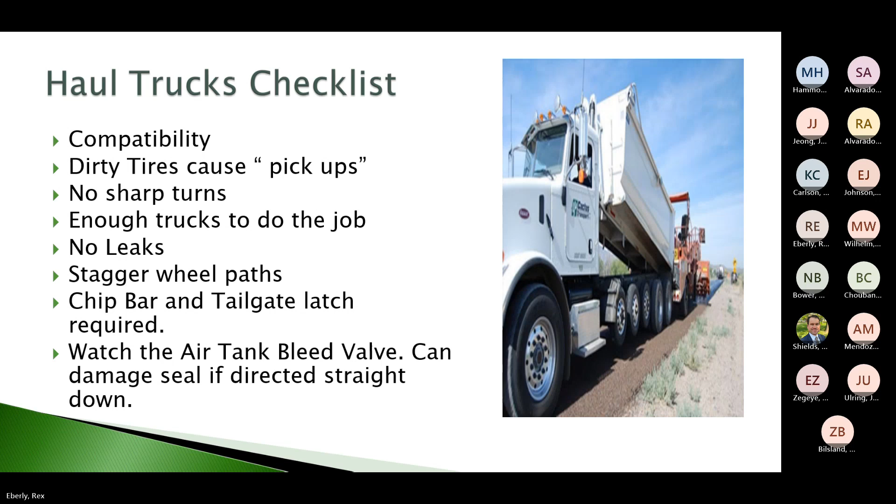Some truck air bleed valves go straight down, and if it bleeds a bunch of air at the wrong time, it can actually damage that seal - it can blow those chips right off of that fresh asphalt. So if you see that happening, we might need to put some 90-degree angles on those. We also want to make sure that our hitch and hitch bar on the trucks hook up correctly.

Okay, this is one of the most important parts of the chip seal job, and it's one we don't even think about a lot, and that is the stockpile and loader. Number one, that loader, hydraulic leaks are killers. We can't be getting hydraulic fluid or diesel onto our chips. The asphalt won't stick to it. We need to keep that stockpile clean and stable, so we're not pushing mud up into our chips. We need to be free draining, so we don't have our chips saturated at the bottom of the pile. And I think one of the biggest mistakes contractors make on a chip job is they handle that aggregate too much.

A specification of minus 200 of 0 to 1.5 is best practice, and really 0 to 1 is best practice. That's great if you check that at the quarry and get 0 or 1% minus 200 at the quarry. But if they put that in a truck and ship it 100 miles, and the contractor dumps it on the ground and comes in with their loader and builds a mountain of chip seal aggregate, driving that loader up the mountain to keep it stockpiled, they're liable to grow fines. You're going to take a rock that was in spec, and by the time it gets out to the road, it's got more fines than what we want, and there's a chance that emulsion is not going to stick to it because of all those fines.

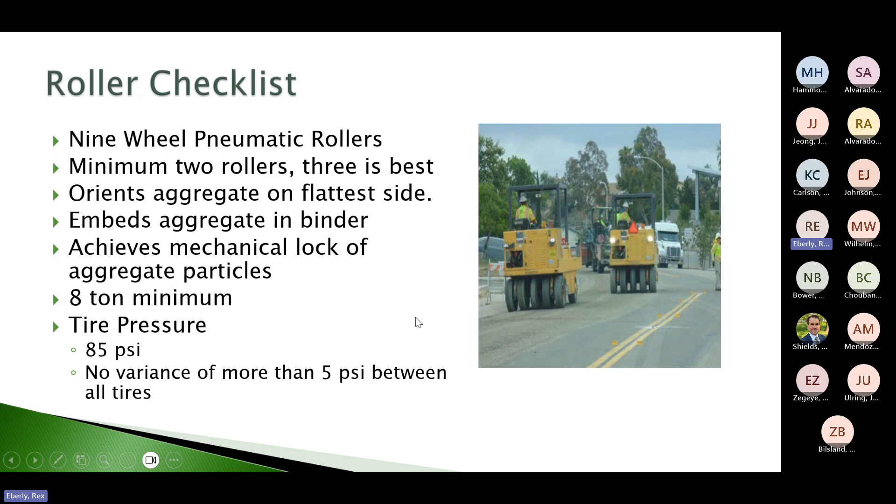Again, best practice says we want to use the pneumatic roller for the chip seal. Broom checklist: the brooms can make or break you. Number one, they're used for cleaning ahead of the game, but then they're used for removing fresh chips, so we don't have windshield damage. We really want self-propelled, 4-wheel brooms. Those little 3-wheel kick brooms are great for small jobs, but because of the 3-wheel design, they're not as stable, and that broom core can dive in and actually remove too many chips if we're not careful.

The main thing with brooming, we'll talk about it a couple times, but do no harm. We just want to be removing the loose chips, not pulling chips out of the membrane. Plastic bristles are the best for that. We really don't want a full set of wire bristles. They'll do a better job of cleaning the road, but they can flick those fresh chips out of the membrane. Full plastic is best. If we can't do that, the combo broom cores are okay, but we really don't want 100% wire brush.

Water may be used for dust, and there are times when if we're in a curb and gutter section, we might need a vacuum or a pickup sweeper as well.

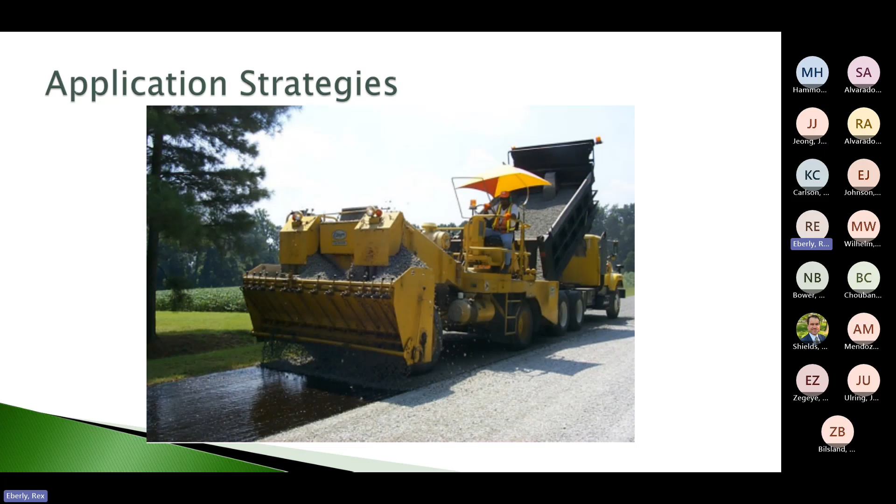I want to talk about application strategy. We've talked about what the equipment should be like, we've talked about the materials and how the materials affect embedment. Let's talk about the application strategies that we're going to use.

We've talked about road preparation and weed removal, fogging longitudinal paint lines, removing any thermoplastic or cold plastic striping. We've pre-swept, we've protected our utilities, we've got our temporary markings in place. And one thing I need to add is we've fog sealed any fresh patches. So we're ready to go.

Traffic is important, and it's a little different on a chip seal. We want to keep traffic off until that emulsion cures sufficiently to hold the aggregate. But once we can safely put traffic on...

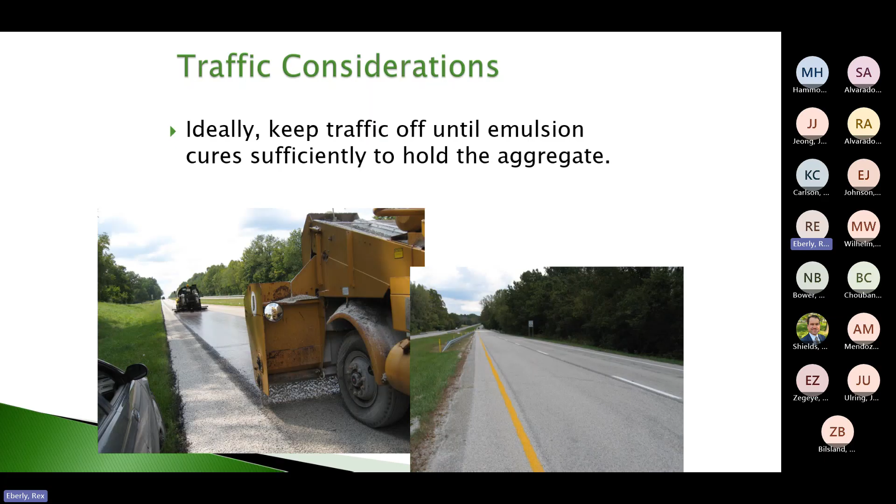If we can use a pilot car to control the speed of traffic, we want to get that rolling 15-mile-an-hour traffic on that chip as soon as we can. Now, if we're not controlling with a pilot car, or we've got a 4-lane section, we don't want traffic just hitting it at whatever speed they want and doing whatever they want to it. Controlled traffic at the beginning really helps that embedment, adds another set of rollers to it, and helps the quality of the chip seal.

Other folks will close that road completely, chip full width, take that 3 miles, open it, and go the next 3 — that's fine too. On multi-lane roads, again, because we can't control the speed of traffic, we want to keep that chipped lane closed completely as long as we can until it's fully cured and we've swept it.

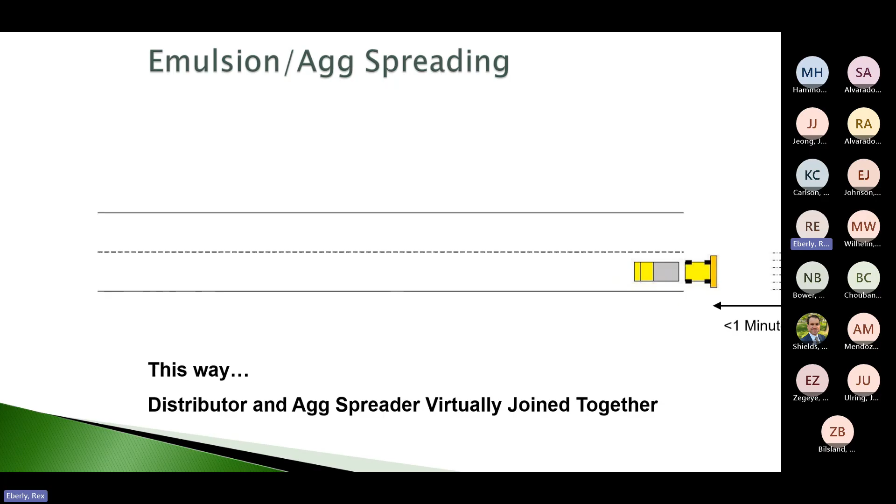So we wanted something like that — we don't want that distributor going way ahead and stopping, and then the chipper having to catch back up, and then the distributor goes way ahead again. We really want that to be a smooth operation as much as possible.

Best practices for air and ambient temperatures are above 55 degrees, maintaining over 40 degrees overnight. I'll tell you, 55 degrees scares me unless it's going to be 55 early in the morning and get to 80 in the afternoon. If it's 55 and only going to get to 60, I personally would not want a chip seal, though some parts of the country only have those temperatures. If you've ever looked in the Bearcat chip spreader or distributor manual, there's a line that says if you're wearing a coat, it's too cold to chip seal. That's a pretty good line to use.

The air and ambient temperature are important, but also think about the season. Temperature in the spring and early summer is different than coming into the fall. In the fall, temperatures are getting less and less, so there's less room for error. If you shoot on a 60-degree day and the next day is 55 and the day after is 40, you're liable to have a failure. In springtime, when temperatures are generally increasing, you've got 60 degrees and maybe you'll get away with it if it's sunny and going to warm up. Really think about that.

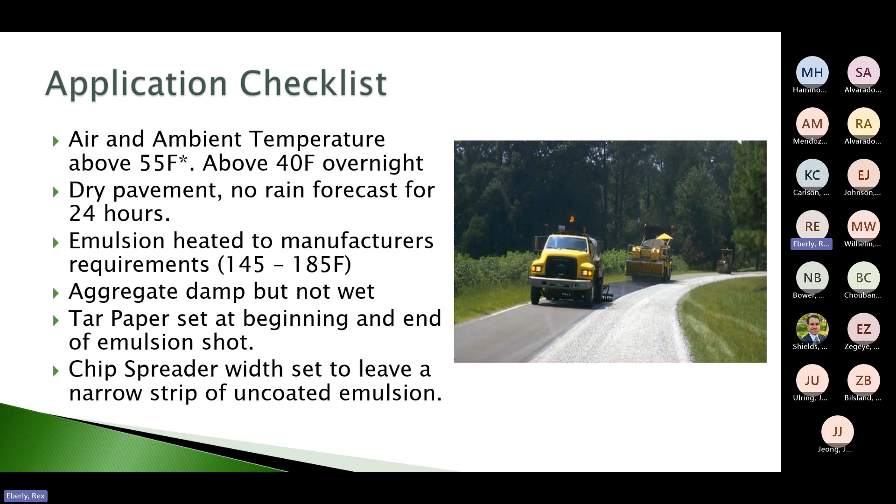Again, the chip spreader should stay within 150 feet of the distributor. We hit that all the time. I know you'll be sick of hearing it, but that's also the most violated best practice you'll see out there. Adjust the speed so the spreader's not bouncing.

It's really good to do a 1,000-foot test strip. With this project and us doing ruts, we want to make sure everything's working and that our embedment is correct. As contractor or inspector, I would ask for 1,000 feet to make sure we've got embedment, that the chipper's working correctly, that the rollers are rolling correctly, and that we're getting the quality we want.

Aggregate application is really important. Next to having the distributor way out in front of the chipper, the next biggest problem most folks have with a chip seal is putting down way too much stone. We're so scared of a bleeding chip seal that we over apply stone, thinking that'll solve the problem. But too much aggregate is just as bad, or actually worse than not enough. We want single stone embedded, and if we get multiple stones stacked on top of each other, when that top stone gets rolled in, it knocks itself out and knocks out all the stones around it, leaving areas without aggregate that will cause bleeding.

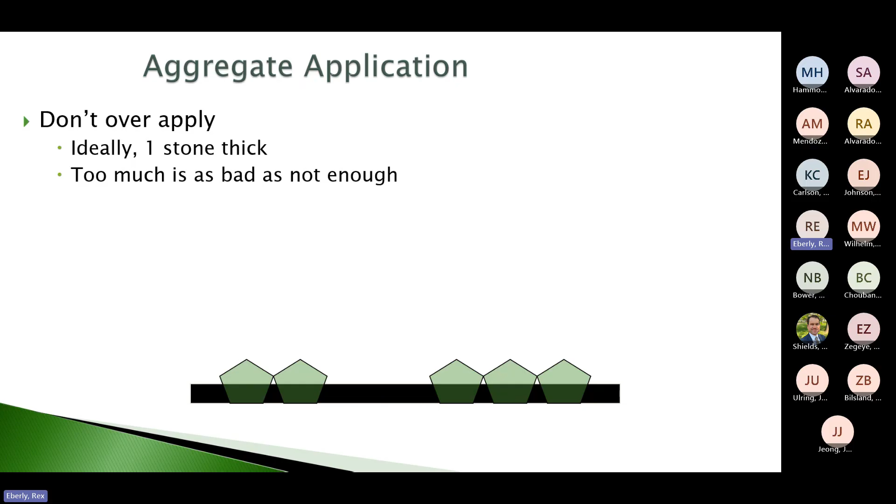So again, we need to think that we are placing a membrane of asphalt emulsion, and we want a single layer of chip dropped on that. Not 3 layers of chip, not 4 layers of chip, a single layer of chip with a salt and pepper appearance. We need to have enough rollers available to make 3 passes while keeping up with the chip spreader.

This is one of the most controversial sections in this best practice: the rollers not exceeding 3 miles per hour. I understand that's low, your spec has 8 miles per hour. The main thing is the rollers can't do harm. So if they're going too fast, whether that's 3.5 miles per hour or 9 miles an hour, if you see rooster tails of material being dislodged, then you know that you're rolling too fast.

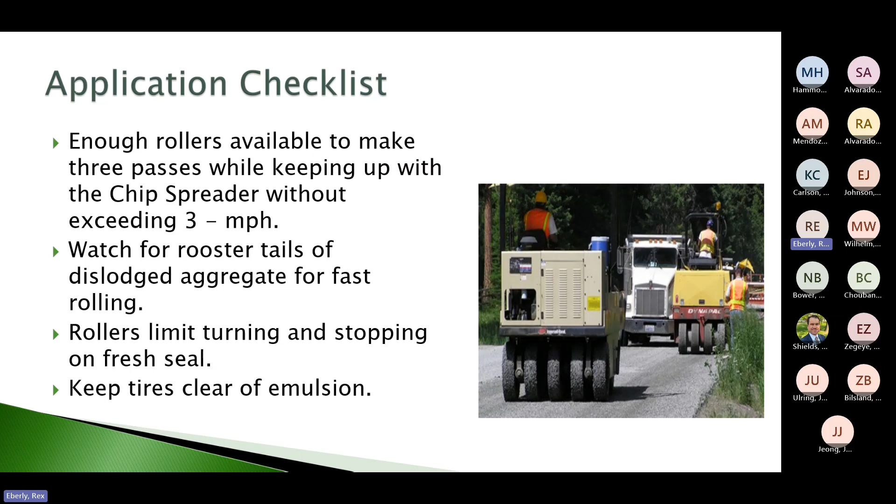Rollers, again, at least 3 passes, and a pass is up and back. There are 2 roller patterns and 3 roller patterns, pretty easy. I will say that a lot of contractors or agencies that do chip seal think that their speed is controlled by the distributor - how fast can I spray the emulsion on the road and keep moving down the road. But your speed is actually controlled by your rollers.

Because for best practices, you want to roll within 2 minutes of application. You want that first roller to hit within 2 minutes of aggregate application. You need to go back and forth 3 times at a speed somewhere around 3 miles per hour, at a speed that's going to cause no harm. And then you need to keep up so that the next chip drop, you're back up there within a couple of minutes. So your rollers are what control the speed of your chip operation.

And I think that's very important. So if you're an inspector and you're seeing that my rollers are way back there, I can't even see them from the chipper, you've got an issue. And the contractor needs to adjust their application speed to allow those rollers to be closer to the unit.

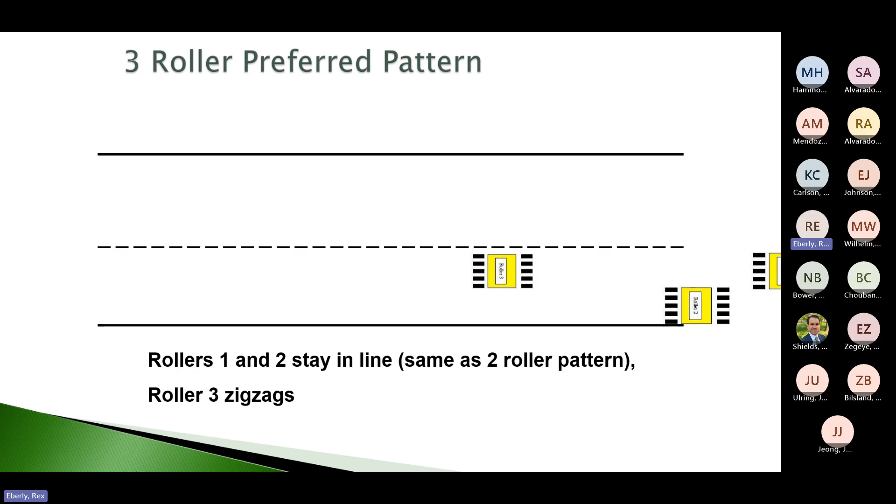Brooming should start when emulsion's cured, usually between 1 and 2 hours after rolling with a cationic system. Again, light brooming only - heavy brooming removes excess chips. Excess chips remove other chips, and your embedment's lost. So the less chips you put down, the less hard you've got to broom. Keep that broom, that centerline joint back if you're doing that. And then you can open to controlled rolling traffic as soon as safely possible.

So final thoughts on embedment. Embedment of the stone is key. Everything you do should be aimed at achieving proper embedment and minimum stone loss. So we've got our depth of our membrane as the chips are being applied, and then just after the chips have dropped in, we've got a certain embedment. And then we're going to roll those 3 times with the roller, and that's going to orient those chips to normally their longest side. It's going to get that embedment even more.

And that last photo there is after some traffic. And what is some traffic? Well, that depends on the amount of traffic. But after a few days of traffic, we want to make sure that we've got no more than 70% embedment.

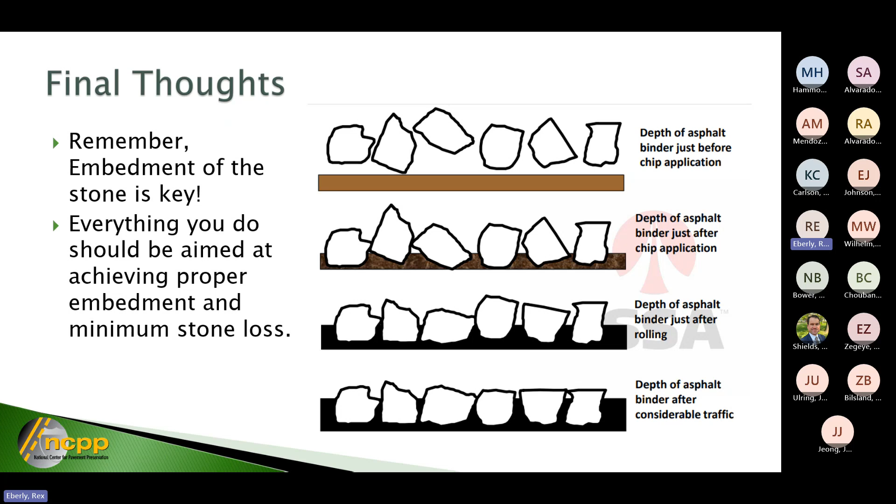So we are going to take a break. Rex, did we lose you? No, there you got me. Okay, there you go. Yeah, let's take a 15-minute break on this one. So 5 after the hour, we'll come back. How about that?

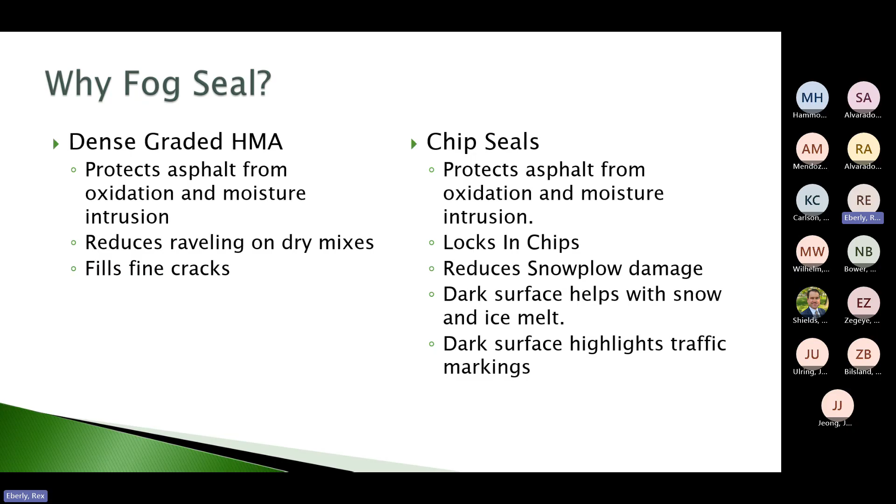But on a dense graded, obviously, it does protect the asphalt from oxidation and moisture, reduces raveling of dry mixes, and fills fine cracks. Folks doing a fog seal on a dense grade as a preservation treatment are getting a lot of use out of it. Chip seal, obviously, again, we're protecting the chip seal asphalt from oxidation and moisture. We're locking in chips, reducing snowplow damage. Dark surface helps with snow and ice melt and highlights the pavement markings.

Emulsion fog seals are kind of all across the board. There's folks using CSS1H, SS1H. Some people will use CQS, which is a quick set slurry emulsion. They feel that gives them better return to traffic. Some states are using the non-tracking tack. Some folks are fogging with a polymer modified rejuvenated emulsion. So really the emulsion that you choose is kind of up to what's available and what you're normally using.

We like best practices where the material is pre-diluted from the emulsion plant. We don't let just Joe throw a hose up over the top of the distributor and try to get it diluted and then drive it around the block twice to mix it up. We really want that dilution to happen at the emulsion plant. Pre-dilute, normally folks like to look at about 27 to 35% residual asphalt. That CSS or whatever, most folks, or I guess the emulsion - we want to heat that to about 150 prior to application, and again, never go over 185.

If you're going to use a blotter aggregate, a fine aggregate works fine. Use as needed for pedestrian traffic or if you've got over applied emulsion or anything like that. Emulsion application rate typically ranges from 0.1 to 0.15 gallon per square yard.

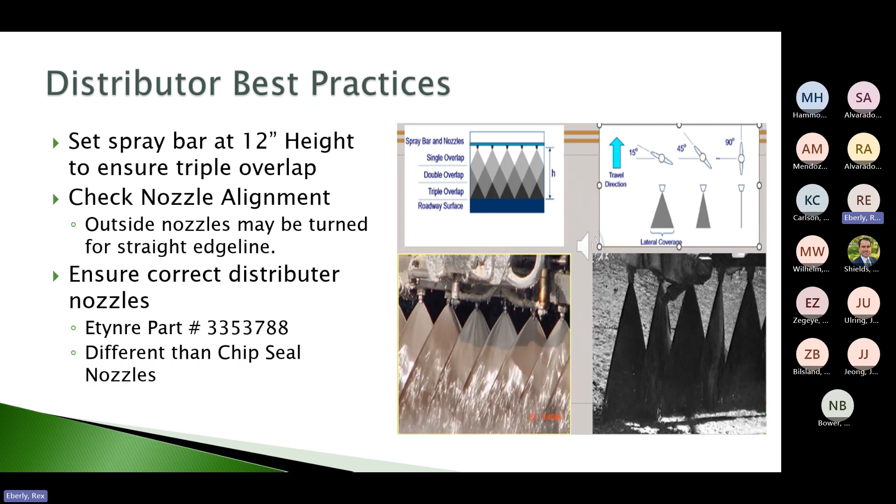Best practices of the distributor are the same really for fog seal as they are for chip seal. We want that 12-inch height, and most of the time we want a triple overlap. There are some contractors I've seen who have experimented with every other spray nozzle and fog in that way. There's reasons to look at that if it gives you a better application, but generally we're looking for the same setup as we would for a chip seal. Again, we want to make sure we've got the correct distributor nozzles. They're different than chip seal nozzles because we're at a lighter application rate, viscosity is different, that sort of thing.

Best practices: we want to sweep the roadway, especially on the portion that isn't freshly chipped, because we should have swept well with the chip seal. We've got to cover our manholes, valley gutters, accesses, everywhere. And we want to start with that 500-foot test strip to check our application rate, make sure we're getting all the aggregate coated without ponding, and make sure we're not rolling or letting emulsion run off into the ditch or shoulder. We just want to make sure everything's looking good, that our nozzles are all working.

One thing some folks like to do is cut that spray application in half and spray both directions. They feel that gives them better coating, especially on the downside aggregate, so we get better coating all the way across the road. That's not necessarily a best practice—it's something that works for some applications and not others. But obviously, as an inspector, if a contractor wants to try that, there's no reason not to. Obviously, we want to allow that asphalt emulsion to cure before we allow traffic. Minimum cure time is going to be 30 minutes, but that depends on environmental changes, conditions, application rate, and all sorts of stuff.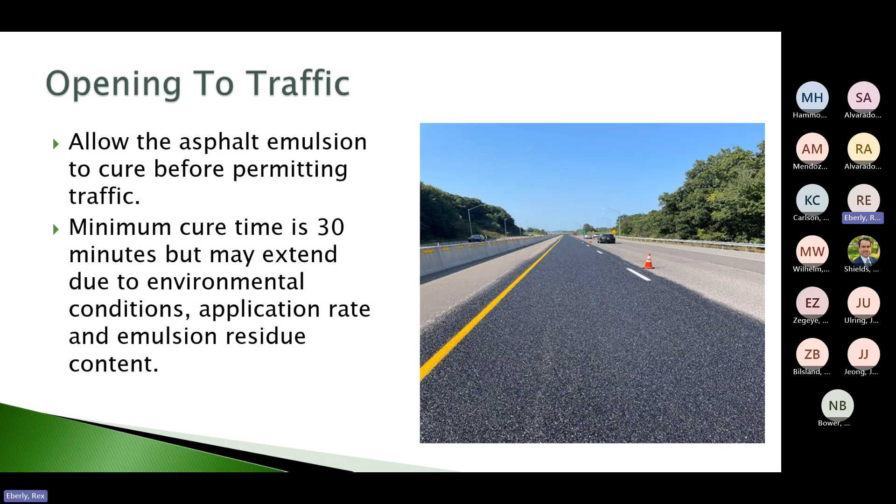Troubleshooting: if we've got excessive splattering, bar height is probably too high or too low, or spray pressure is too high. If we're getting streaking, our emulsion may be too cool, it's not pumping correctly, we might have nozzle angles off, bar height might be off, we might have plugged nozzles, or pump pressure's too low—clogged streams. Those are the things to look at as an inspector or contractor if we're getting streaks in our fog seal.

And then, of course, if we're getting bleeding or flushing, that application rate's too high for the conditions. We need to remember those conditions may have changed in the last 500 to 1,000 feet of road, so that's very important.

Let's stop. I just want to make sure there's no questions on the best practices we've talked about, both for chip seal and fog seal. I don't know if our contractor made it—hopefully he's on board with all this. If you've got any questions or comments, or you don't do things the way we've talked about, I'd love to discuss it. So anybody got anything?

I don't think our contractor was able to join. Oh, okay. All right. Well, then you get to tell him what to do, huh? Yep. Never, ever miss a training class if you're a contractor—you gotta, that's a bad form.

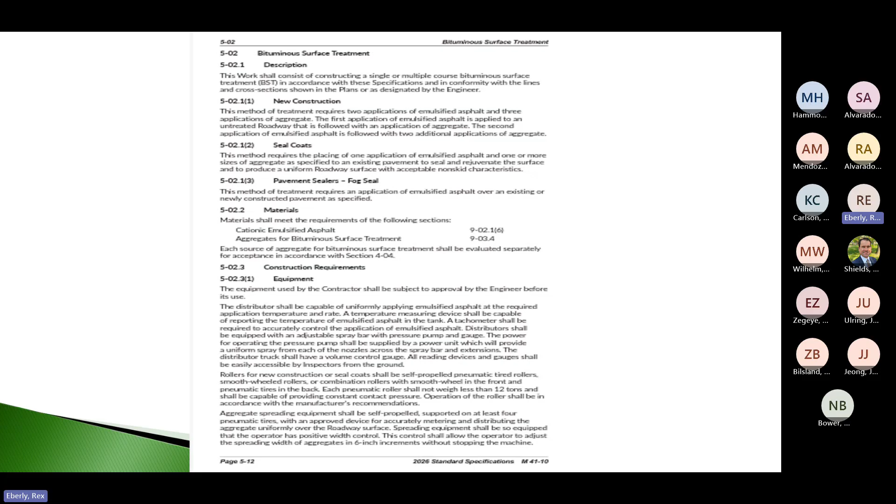The aggregate spreading equipment, that's good—you need it to be self-propelled. We're not allowing them to use a truck bed spreader, and that's good, and they've got positive width control. So your spec here on the equipment end is really good. Pretty light on the broom spec, but that's really all you need here.

As we go down into 502.32B, which is where we get into seal coats, not new construction, for the prep we're talking about sweeping with a power broom until it's free of dirt. Hand brooms might be needed. Obviously, if there's any dirt, aggregate, carcasses, or whatever on the road, we're going to have a failure there—the chip seal's not going to stick to the road. So cleaning the road is vitally important, and that's one thing that a lot of times causes failure because we did not clean the surface correctly.

We are calling out crack sealing, and I believe you are crack sealing this project, and that's good. Again, we want to make sure - I think the way the project's set up, the sealing probably won't be done 30 days out. That's okay, that's not best practice, but we do want to make sure they're keeping their overbands thin. We don't want globs of crack seal up on top, you're going to feel it. We want to keep their overbands as thin as possible, but make sure they're following other best practices for crack sealing.

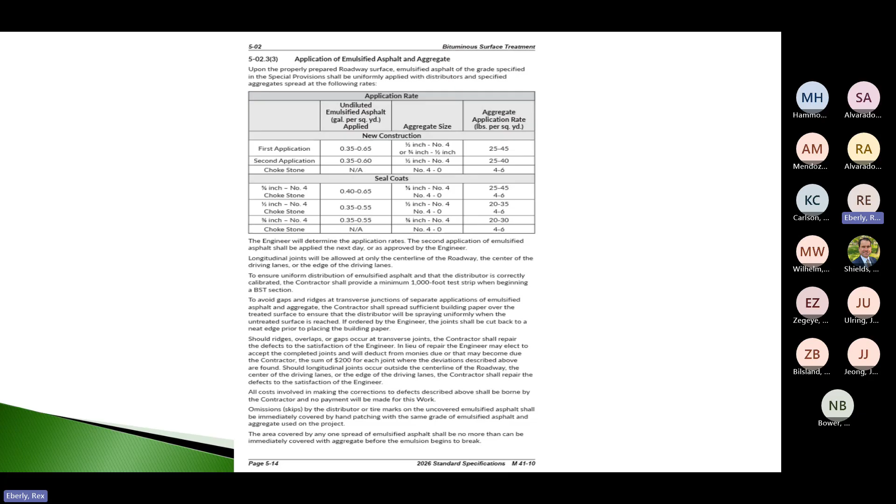You don't really talk about the distance between the distributor and the chipper. However, you do talk there at that last line, the area covered by any one spread of emulsified asphalt should be no more than can be immediately covered with aggregate before the emulsion begins to break. So you can use that if they're letting that distributor get way out ahead of the chipper, because I don't remember seeing where you had a distance or a time limit in your spec. I might have missed it, but we can talk about that.

We talk about even application, spreading in one operation. We talk about an 8-inch strip of asphalt being left exposed to form a joint, and that's fine. That's best practice. Like I said, 8 inches is a little higher than I've seen in a lot of places, but there's nothing wrong with that.

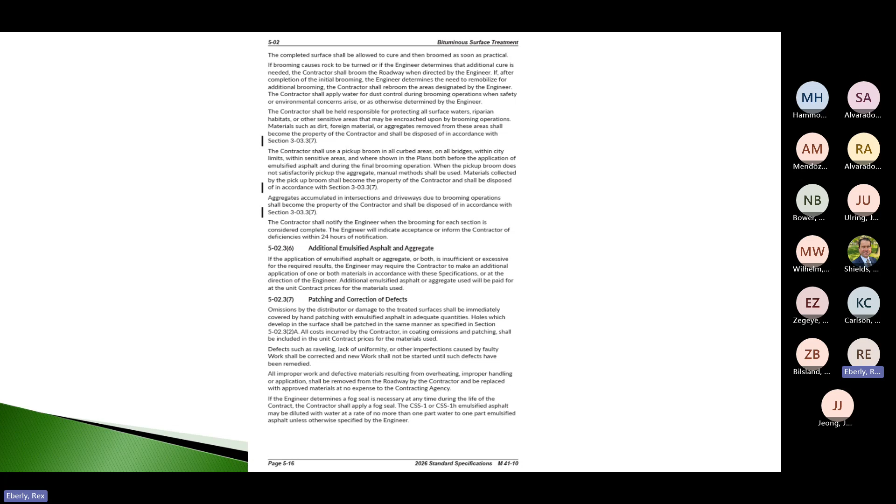Let's go back to, you do require a choke stone, I think that's necessary just to make sure we're not getting any bleed. Your specifications are pretty good, we didn't see anything that needed to be changed, and that doesn't fall under best practices. There's little differences here and there, but I think they're fine and there's nothing we really need to talk about.

Your weather limitations are 60 and rising, not less than 70 degrees when falling, and I do like that. The wind should be less than 15 miles per hour, surface temp not more than 140 degrees, and then you've got your May to August construction time. So yeah, it's all very good specification, I think that's good stuff.

All right, we are right on time. So again, what is this study all about, and what are we doing out there?

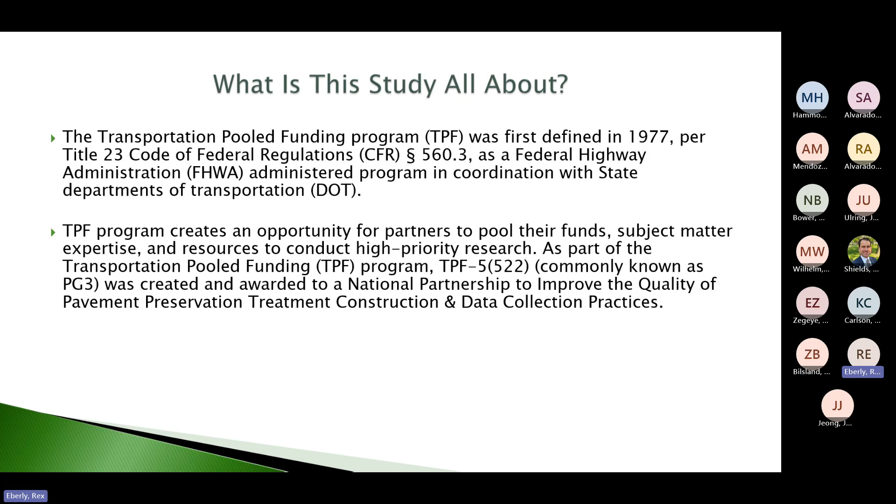It's a pooled fund, and it allows folks to pool their funds so they get subject matter expertise. In these meetings we have folks learning from different states, and then we're going to be able to take all this data and get it back out to the states. You're going to be able to learn what Minnesota learned on their Cape Seal, what North Carolina learned on rejuvenators, and there's other good stuff coming, some recycling projects. This is all about helping states get better pavement preservation projects, that's all we're trying to do. So this all fits into the PG1 test sites, PG2, the Minnesota test facility, and then the national partnership through all these folks. We've talked about all that.

So the test cell construction. Now this gets a little confusing for folks, and I do wish, I was kind of joking a little bit, I do wish the contractor was here, because we want the contractor to understand that yes, this is a test project, and yes, there is a test cell that they're doing, but in no way do we expect to slow down the contractor and keep them from getting their work done because we're observing this test strip.

We'll either have probably both, I think we've got some FP2 people, those are contractors or suppliers up in the Pacific Northwest that can come down and be part of the day we do the test cell construction. Hopefully I'll be there from NCPP, as long as it's not the first week of August, because I'm booked that week, but after that I should be good. We'll deal with that, it might be Todd, it might be Mark, we don't know, but we'll have someone there. This test cell, we're just there to observe, and we'll talk about all the things we're going to observe here in a minute.

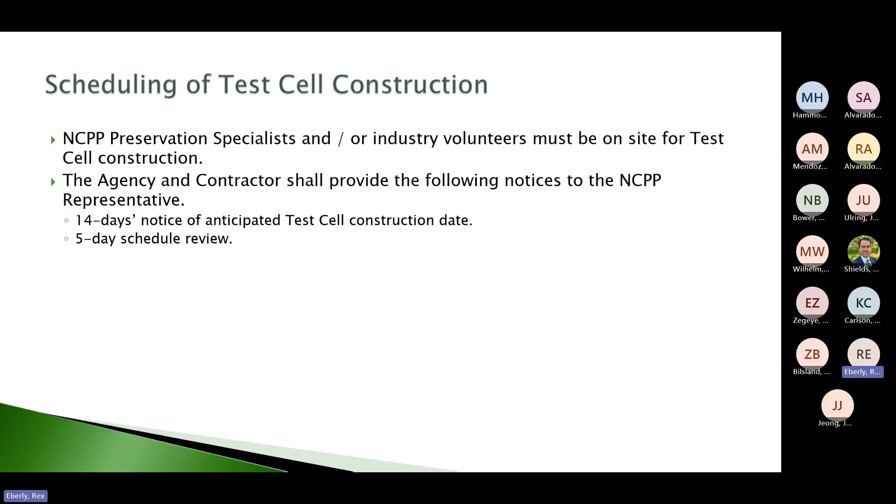And then we kind of want a 48-hour go, no-go. We understand that things happen, but 48 hours out is when I'll have to leave, the next day. We just want to have a discussion with you, what's the chances of it happening within a couple days of today? So if I fly out and hit the ground and all of a sudden the chipper breaks down and it's down for a day, or it rains, we'll wait for a day or two to make sure the test cell gets construction.

But like it was in Alaska, they never knew when they were going to go because it was all weather dependent. So if we either can't come out because of problems, or we come out and problems happen and we don't see the test cell happen, it is what it is. But we really want to have someone from our group on site the day we do that test cell construction, and the main thing is there to help you all gather the data that we need. We're hoping we get this done during weekday daytime hours, but we understand it could be a Saturday or Sunday.

Do we have your test cell location? I know we know the project, but do you know where you want your study section? Roughly about 3,000 feet? Yeah, unless that's changed. Has it changed? I don't believe so. Yeah, it shouldn't have. I think we were going at the ends, if I remember correctly. But let me check, I was thinking it was right in the middle.

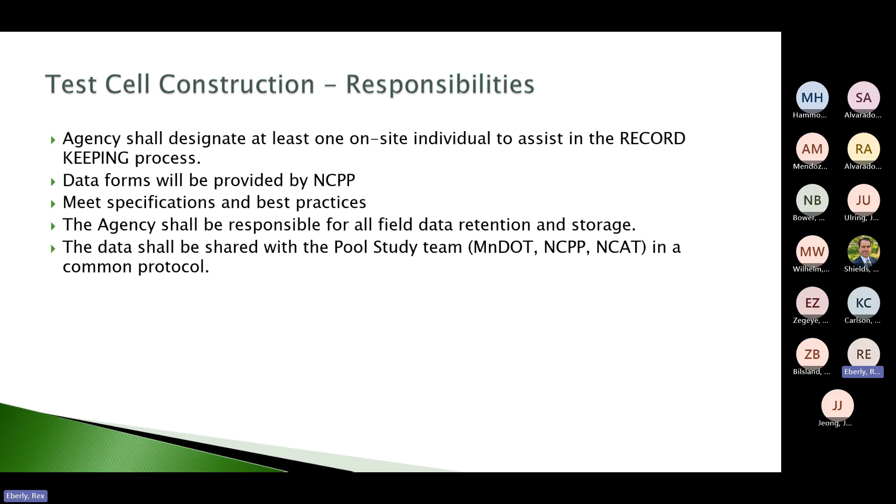We want the agency to make sure their specifications and best practices are met through your inspection process and your specification process, and that's why we do this training. You're responsible for all field data retention and storage, but we keep it too, so that's no big deal. And then we ask that all the data be shared with the entire pool study team, MnDOT, NCPP, NCAT, in a common protocol, which is all we've done. As long as you're using the forms that we provide, we're in good shape there.

Our job with NCPP is again, we'll go through the equipment, we'll take a look at the material in the stockpile, and we're not doing this to catch the contractor or prove anything's right or wrong, we're just doing it to gather information. And if we see that a best practice isn't being followed, and yet we still get a good project, well, that gives us something to study. Or if we see that the best practice isn't followed and we have a failure, that allows us to change our training or maybe change how we write our best practices.

So that's the only reason we're here, is to learn, observe. If there's questions out there, if the contractor wants to understand the best practices or wants us to talk to the crew about anything, we're happy to do that. But if not, we won't even bother the crew other than to get access to the information that we need.

We're here to assist you all with the completion of your data forms. We also hope that our FP2 partners in the area can go out a few times over the next few years and take a view of the project and make sure how it's performing. We'll do an after action review of how the test cell went, what happened, what went right, what went wrong, and that goes into the data. So that's what NCPP does.

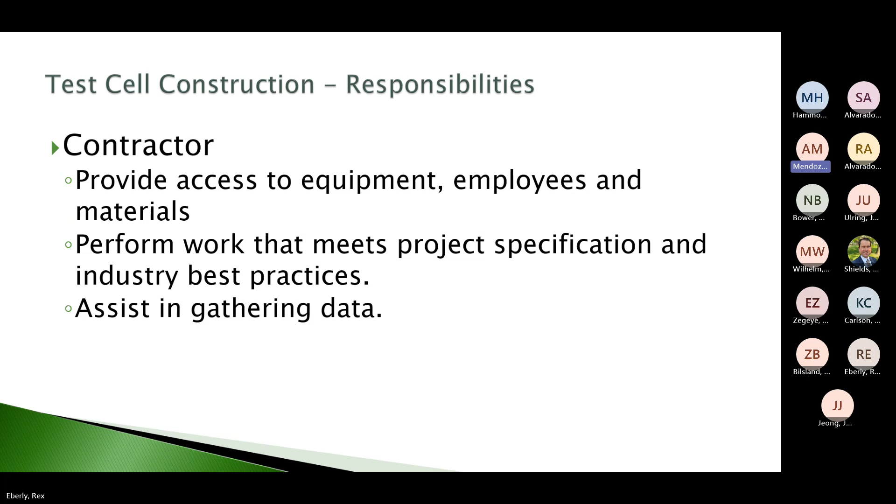If we have any industry volunteers come out, they'll assist NCPP. They take photos, videos, and hopefully they'll be able to review that project in post years after we're done.

Again, so I think that's the right project. It was the SR14 section. I've never been in that part of Washington State, so that'll be good.

So we're performing pavement repair in high distress areas, basically remove and replace, but you're only doing surface removal. Was this the one that's like 60 years old? It's been chip seal after chip seal. Is this that section of pavement? That's amazing. Got some shoulder repair.

We're crack sealing full width. We're doing a 3-foot nominal width surface treatment using CRS-2P in each wheel path. Okay, does anybody know?

My guess is the contractor is going to set up their distributor and their chipper to pull these two wheel paths all in one pass. Hopefully the ruts are consistent enough they can do that. That's going to be something as an inspector we want to look at. If those ruts are roaming around in the lane, getting further apart and closer together, that might make things really interesting. So we'll have to see how that goes.

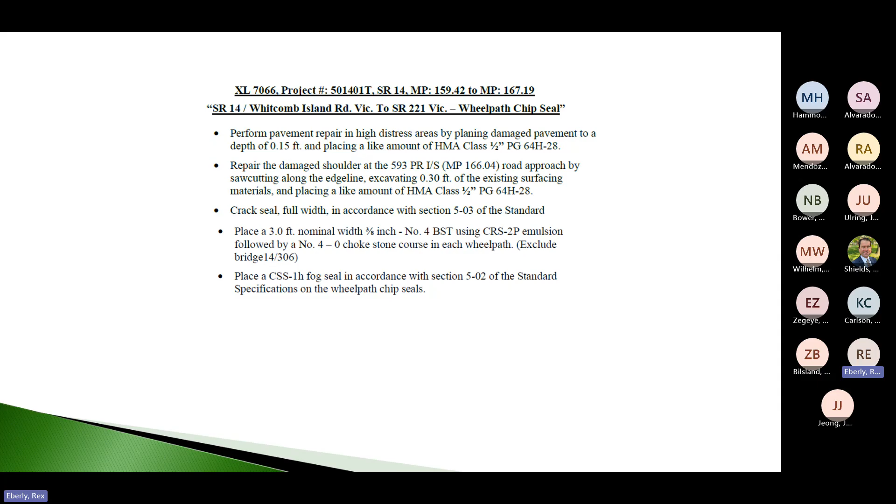So here's the chip seal pre-construction form that we can help you all fill out. Most of this is going to come off your data, but we already know the type of binder is asphalt emulsion. We need to find out if there's a design method. That's something you all probably want to check on. Any comments on that? Our application rates from the design, any material test results, we'd like those sent in, gradations, emulsion testing, whatever.

The general condition, there's the LTPP severity, which goes above my pay grade, but what are the primary and secondary distresses? We can help with all that. If there's any questions of what we're looking for, we've got folks from MnDOT that can help with that. But this is the type of pre-construction information that we're looking for.

And then we have, well, this was the scrub seal, but it's all about the same as we talk about what preparation was done. We've swept it, we know we've got some patching we're doing, we've got some edge shoulder repair. Any comments on that? Did we have to do anything to the pavement markings? Well, probably not on this one.

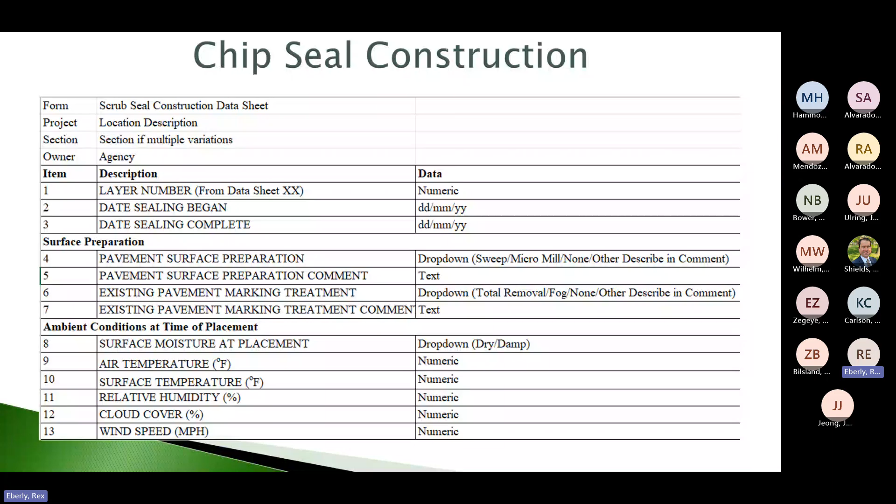500-foot cell. We'll check on how many distributors they're using. Do we have a calibration? Do we know when it was done? Are there any documentation we can put in there? The manufacturer, the nozzles, the angle, all that good stuff we've got for all the distributors.

Again, that's what myself and any NCPP or FP2 volunteers will be working on.

We'll talk about the rollers. We'll check the rollers, get the make and model, and hopefully we can get the weight. Make any comments on the rollers. Same with the brooms. Record information on the aggregate source, the aggregate type.

Very simple, there's really nothing here that's not normally taken by an inspector on the job. Here we want to know how long it took from once the asphalt emulsion was sprayed to when we dropped the aggregate in the test cell. How long did it take them to hit that first roller pass? How many times did each roller make the pass?

We kind of got all excited here. We've got lots of application rate checks, which is really hard on a 500-foot section, but we'll try and figure out what that rate was from the computer at the time they were going by. How long did it take to open to traffic? How long did it take to broom? All these things are what we're there to help you get.

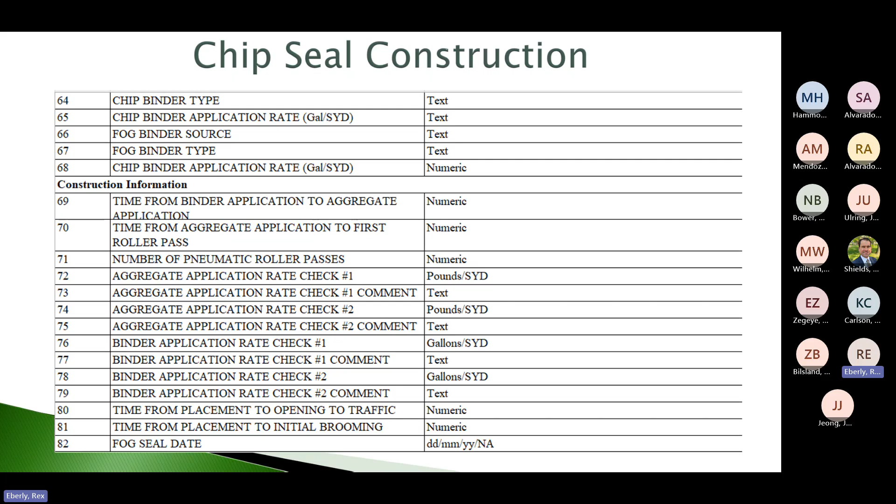When did we fog seal? We'll have to get that from you, we won't be there for the fog seal. How long did it take to open to rolling traffic? What was the application rate? Very simple stuff.

Nothing major. Again, we're going there on a 500-foot pass, but really we can take a lot of this data from the day that we're working. So it's pretty simple. There's a material test form that we put out. You can probably turn this in on your normal aggregate testing sheet, just give it your DOT, but we have that test form there.

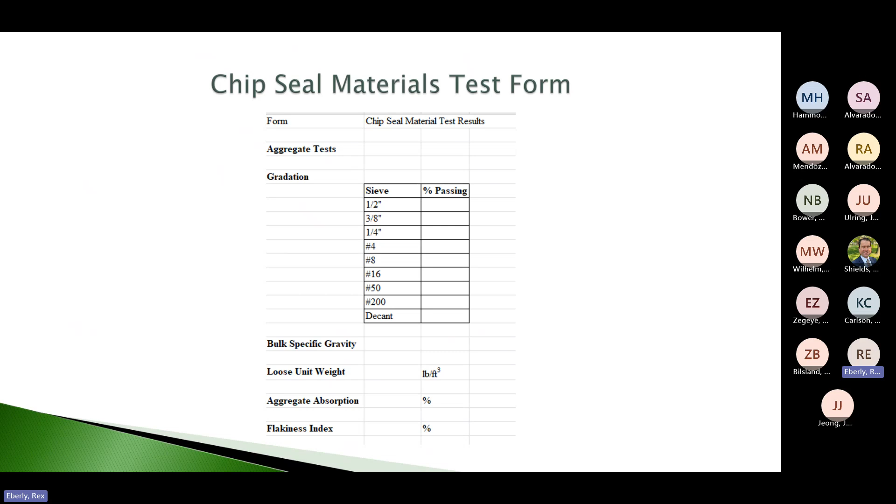And that's about it. What questions or comments do you have on the test cell and on what we're looking for?

I have a question for the WSDOT guys. Who's our main point of contact for this construction? Matt Wilhelm will be your main point of contact, he'll be the chief inspector for the job. I had written that down, but I wanted to double check that.